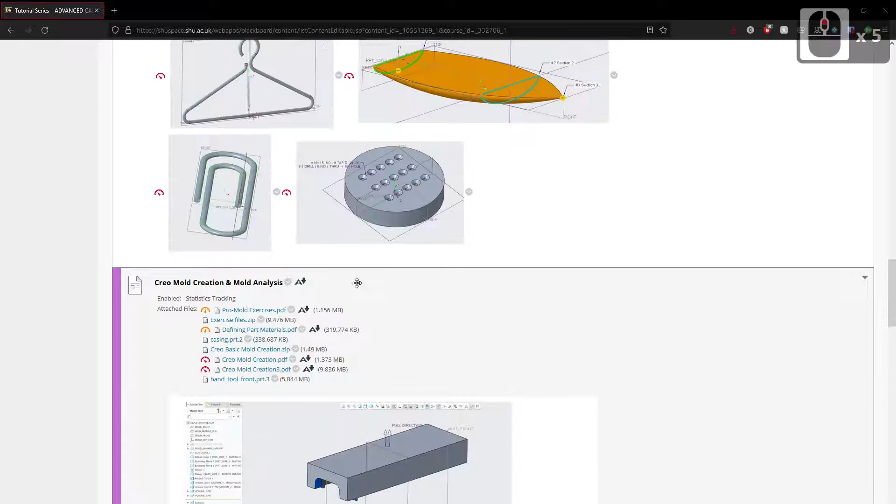Okay, so in this week's tutorial, what we're planning on doing is taking the design of our handle front that we worked on last week, so that is this half of the overall handle, and then using a module within Creo which allows you to produce moulding tools from your designed parts.

So the area that we'll be working from is here in the learning materials, just after last week's material. There's a screenshot here of what we're hoping to achieve by the end of the session. So hopefully you can tell this is a two-piece mould, and it will create the part that we've just talked about, the handle front that we were working on last week.

So before we get started, if you just want to go back to the top of the page and take a save of the config_D.pro, so that would be this file here, and then when you've booted up Creo, you need to apply that file just to set all the config options. Otherwise some of the activities that we're going to do in this tutorial won't work properly. So I'm going to apply that now.

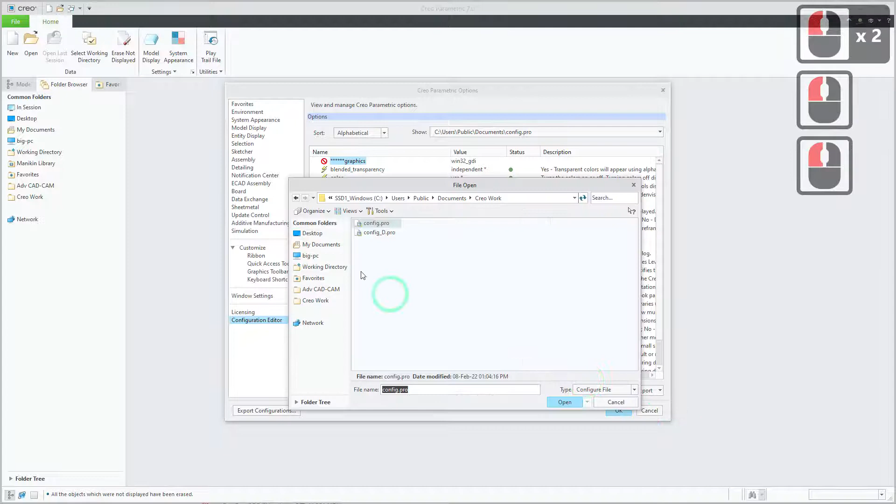So File, Options, Configuration Editor, Import, find where you've saved the file to. So there's my file in my work directory. Click on OK, and then click on OK again. And if you get this pop-up, you can just answer no to that. You don't have to save that file again. You can just answer no.

So now what I'm going to do, I'm going to set my working directory. Now I've already done this before I started recording this session, so you can see I'm just working in my documents and in a folder called Creo Work that already has some files in there. And then I'm going to go back to the learning materials, scroll down to where we're working this week, and I'm going to do two things.

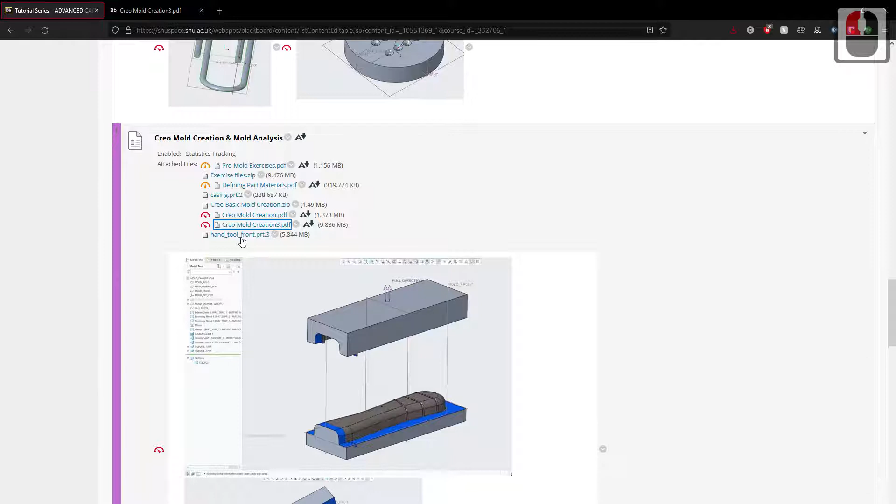I'm going to open up this PDF here, because that's what we'll be working from. So if I middle click on that, that will open up in a new window. So that's just loading in now, and that's what that should look like. That's the first page of the PDF, and I'm going to need to download this part file as well. So if you right click on that, save link as, and then navigate to wherever you're going to save it.

Now one thing that you have to be careful of here is that some browsers, Chrome included, or Firefox, often add extra brackets and numbers into the files that you download. So you can see here I've got a brackets 1 close brackets, and if I don't delete that like that, Creo won't be able to recognize that file.

So you have to make sure that the file that you save is named exactly as it's shown there, hand_tool_front.prt.3, and then you can save that into your directory. Now I already have a copy of that in the directory, so I don't need to press save there. So let's get started on the actual tutorial itself.

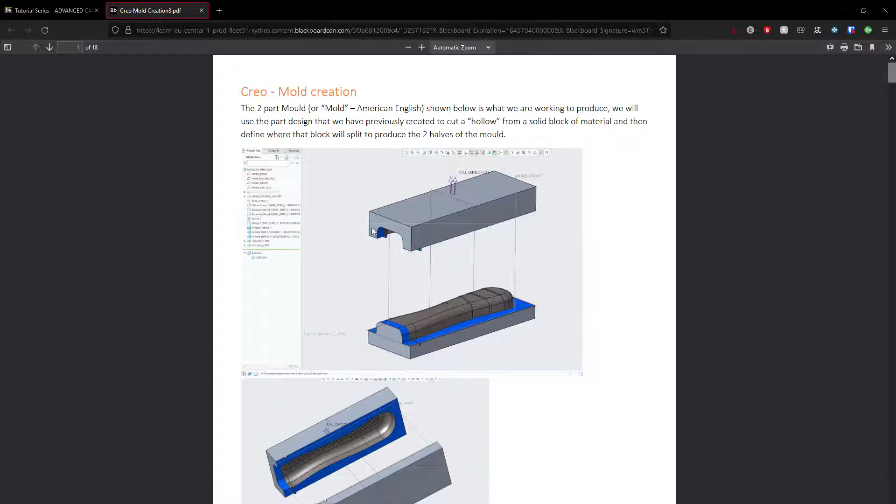As I've already said, what we're aiming to create is this two-piece mould, and in order to do that within Creo, it's a multi-step process whereby you start with the part design that you already have. In our case it's the handle front, and then you gradually build up the geometry that you're going to need to fully define the size and shape of this moulding tool. So that's the kind of broad outline of the process.

I've put a slightly more detailed outline here, and this is quite useful if you're having to replicate this process at any point for your own projects, let's say. If you just remember to work through these 9 points, then you'll have covered all the major steps required to actually produce these two halves of the mould.

Now there are other steps that we're not going to go into in this tutorial that add further details to the mould, such as runners or mould clamping fixtures and various other things that you would want in your mould, but this covers the basic steps of producing that two-piece moulding tool.

So I'll keep momentarily referring back to this PDF guide, but I won't necessarily view all the steps, but you can keep this guide. You can work through it at your own pace in conjunction with this video or just on its own, so that is entirely up to you, but the guide is reasonably comprehensive in terms of the steps that we have to go through.

So the first thing that we're going to do is create a new file, so that is this step here. So I'm just going back to my Creo window. There's Creo. So I'm going to go new file. What sort of file?

This is going to be a manufacturing file, and the subtype is going to be mold cavity, because that is what we're trying to produce. And then I'll give this a sensible name. So this is a mold for the handle, so I might call it handle FR for front, and then it's a mold tool, so I might put the word mold at the end of it, so handle front mold.

Click on OK, and then depending on what systems you're using and how those systems have been set up, you may be confronted with this screen. This is essentially asking about the unit system that we want to use and the part template. So I'm going to use millimeter newton seconds. So if you select the same option there, that will be fine.

Then we get dropped into the mold creation environment. It's very much like the standard assembly environment that we've already done some work in. We get our three datum planes here, so we get a right, what is essentially a top plane, and a front plane, and then we get a default coordinate system as well.

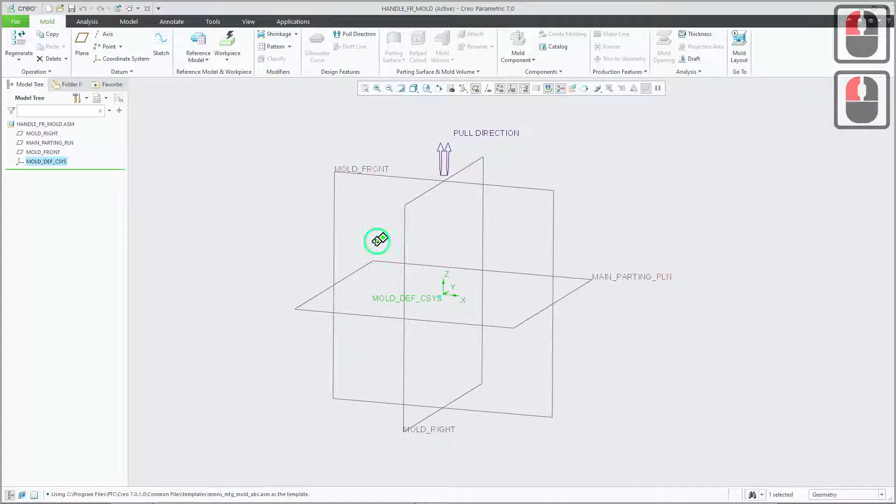And the first thing that we're going to do is bring in a copy of our finished part. So we're going to point the system at our finished part file and tell it that that is the part that we're hoping to create a mold for. And then the system will import that part, but it will import it as a copy. So that ensures that we don't accidentally make any changes to the part or maybe delete the part. So it creates a linked copy of the part. And when we do this, we refer to the imported part, this copied part, as the reference model.

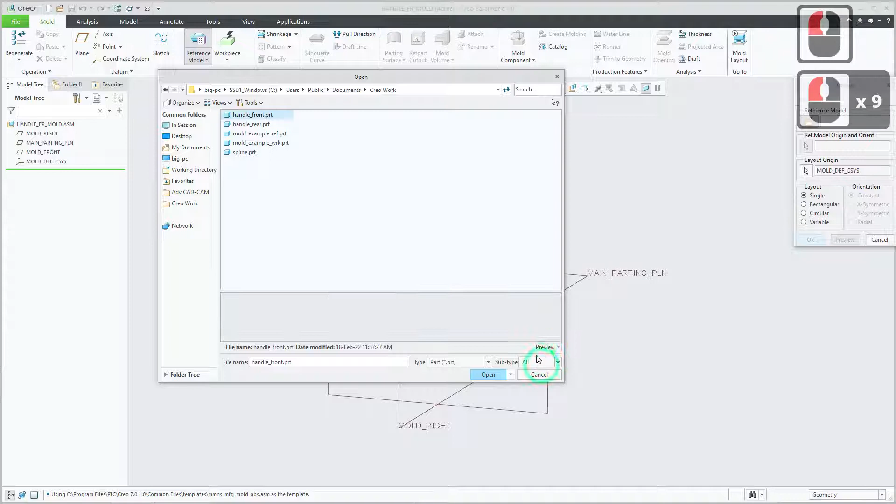So we're going to click on this button here, reference model. The system will then browse to our working directory. You can see I already have the handle front in that working directory. If you're not sure what these files are, if you'd like to see a preview before you open one of them, you can click on preview down at the bottom there, and you get a nice 3D preview of any Creo files before you load them in. So that's quite a nice little extra feature within Creo itself. So I'm going to open this part now.

Then I get confronted by this next screen. Essentially what this is asking is, the copy of your part, do you want that copy to be linked back to the original part? And we can have that link bidirectional, which is this default option that's been selected. Or I think probably slightly safer for us learning how to use this tool within Creo is to select this bottom option. So select inherited. What that essentially means is the original part can affect the copy of the part that we're about to create, but the copy cannot affect the original, which is probably a slightly safer way for us to work. So inherited.

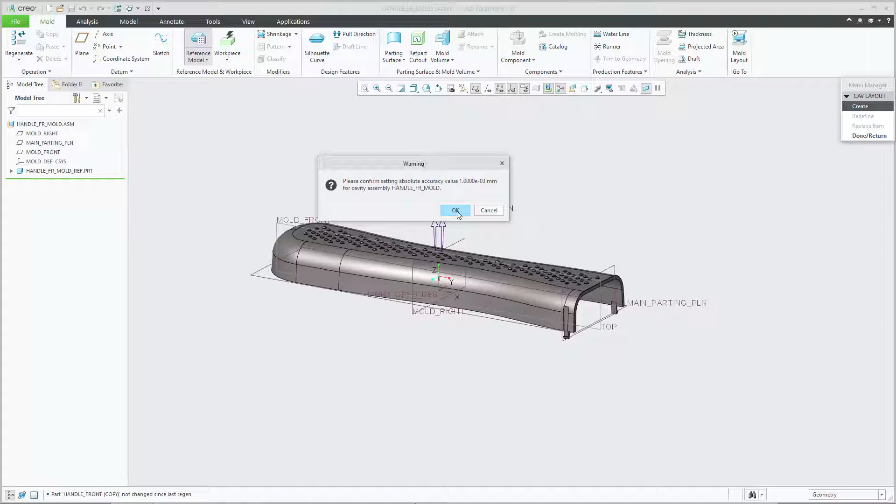Click on OK, and then at that point we should be able to press preview and we can see where the part's going to be placed by default. Now we can play around with that placement, but for this tutorial we'll just accept the default location. So OK. The system will then give us a warning that it's modifying the accuracy of the system. We can just OK that warning as well, and then we can close this little menu because we've concluded those first steps.

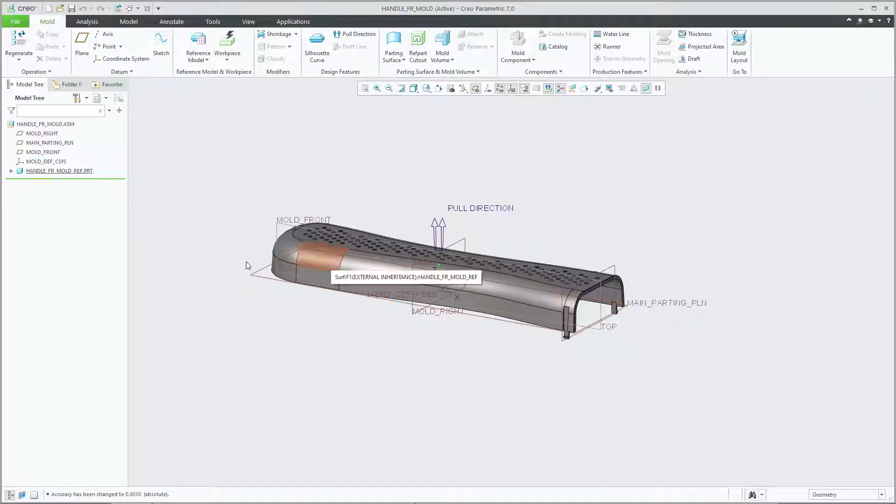So the next thing that we're going to do is put a block of material around our reference model. So here's our reference model that we've just imported. There it is in the model tree. The next step is to essentially block out the final outside sizes of the mould itself. So given that we're producing a two-piece mould, when the mould clamps together, the two halves of the mould, their external shape is essentially a cuboid that is bigger than the item that we're going to mould. So we're now defining how big do we want that cuboid around our reference model.

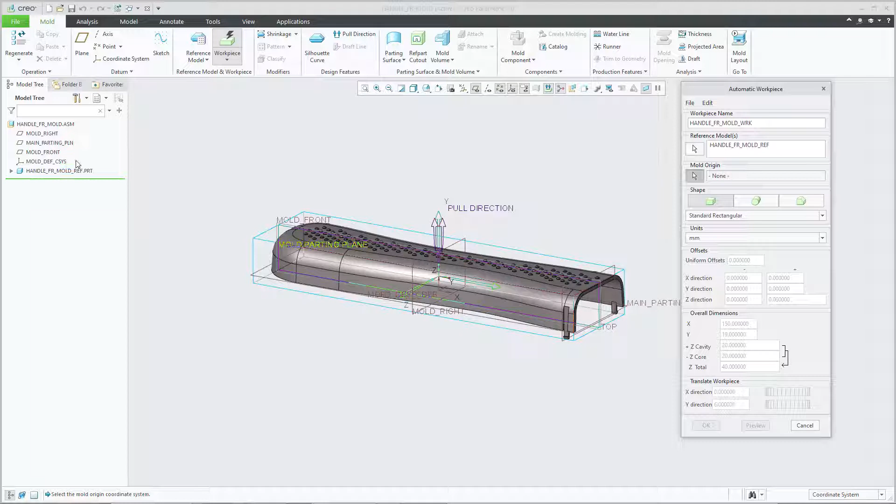And the way that we do that is we click on workpiece, because that cuboid is known as the workpiece. So click on the workpiece button. We need to put two things into this workpiece creation box. The first thing that we need to define is what coordinate system we are going to use to define this box, and the one that we're going to pick is the top level assembly coordinate system here in the model tree. So I'm just going to click on that coordinate system.

You can see that's now being collected into this mold origin input box, and then what I can do when I've done that is just put 10 for 10 millimeters, press enter, and what that does is it offsets my cuboid away from the reference model by 10 millimeters in every direction. So that's X, Y and Z directions, and you can see that below in all these 6 boxes.

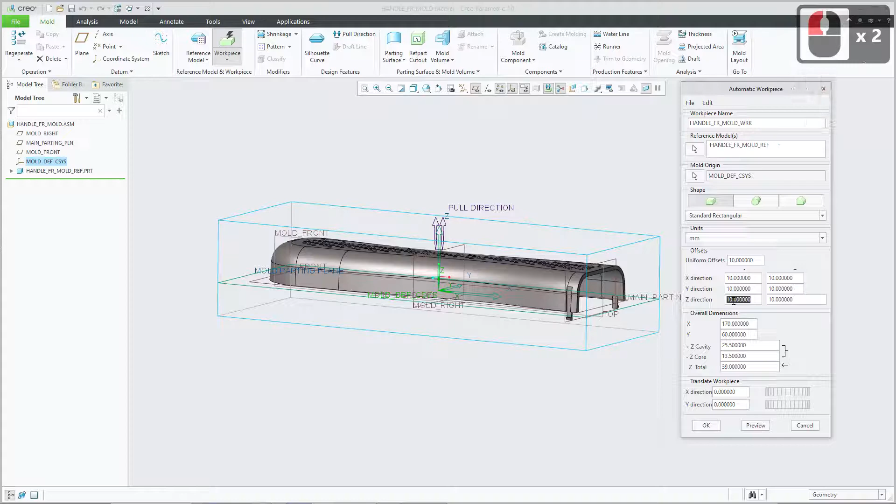So if I want to put some custom offsets in a particular direction, I can then edit these values and maybe have 20 or 30 or whatever value I require in whatever direction, but we'll accept this 10 millimeters in all directions for this particular example. So I'll click on OK. The workpiece gets created, so it's represented as this transparent green box, and there it is in the model tree.

So the next step that we're going to do is we're going to account for any material shrinkage that almost inevitably occurs when you plastic injection mold parts. So the general process is that you will inject heated molten material into the mold cavity. The molten material will flow into the mold cavity, fill the mold cavity, and then normally the mold is cooled down relatively rapidly, and what tends to happen is the plastic that's been injected shrinks slightly.

So in order to account for that, what we need to do is create a cavity that's slightly too big, so that's slightly bigger than the final part that we require. So we're going to do that now, and the button to do that is the shrinkage button here. And then there's two things that we need to enter here. There's the shrinkage ratio of the plastic that we have chosen to use.

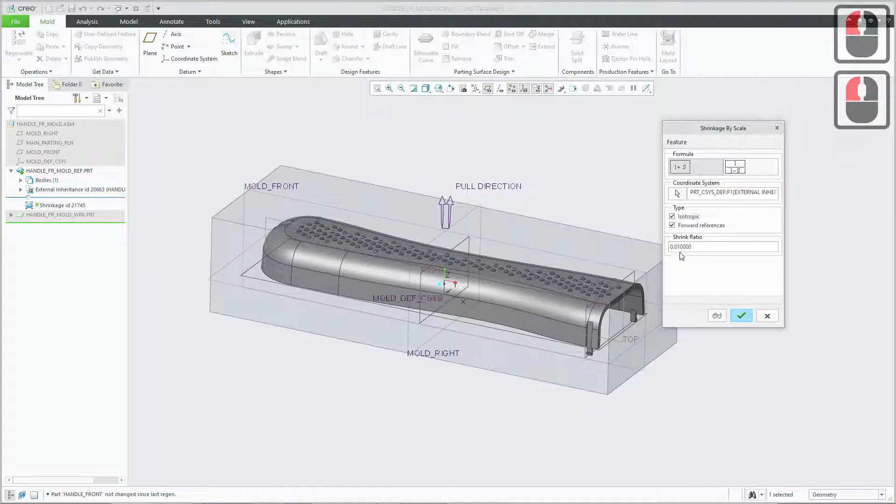We've accounted for the shrinkage, and the shrinkage as a feature in this setup gets stored within the reference model itself. So there's the reference model in the model tree, and if we need to edit the shrinkage at any point, we can browse inside that, click on the shrinkage, go edit definition, and we're back in the shrinkage menu. So say we wanted 2%, we could put 2% in. We don't want to do that at this point, but it's good to know how to do that if we need to further on in the design process.

So let's refer back to our PDF, see how far through we've got. So we've done these steps, we've brought the reference model in, we've created our workpiece around it, we've applied a shrinkage ratio. So the next step here is to define two items, one of which is known as the silhouette curve, and the silhouette curve is essentially the shape of the outside of the part that you would see if you were looking down from above onto the part. So it's that external silhouette of the part itself.

It's all the outside edges as a curve, essentially, or a line. You can almost regard these as a sketch. So it's a single line that traces all the way around the silhouette of the part. And the reason that we need to create this will become clear in the next step after this, where we use this silhouette curve to create a collection of surfaces that ultimately allow us to split the mold into two sections.

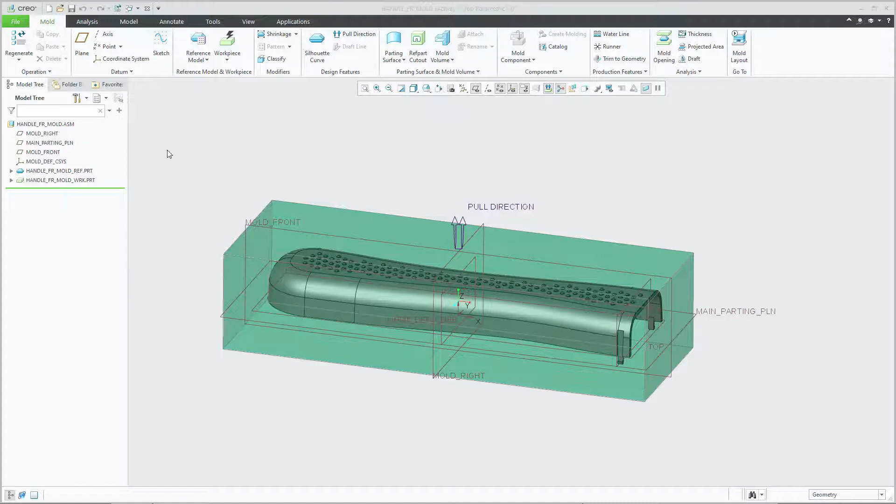So we're essentially creating, if you want to think about it like this, a cutting tool or a knife edge to actually split the mold in two. So silhouette curve, there's a button for silhouette curve, we'll click on there, and really all we've got to do at this point on this particular example is just zoom in and inspect this curve and just check: does it seem to be complete? It does. It seems to trace the entirety of the outside of the part.

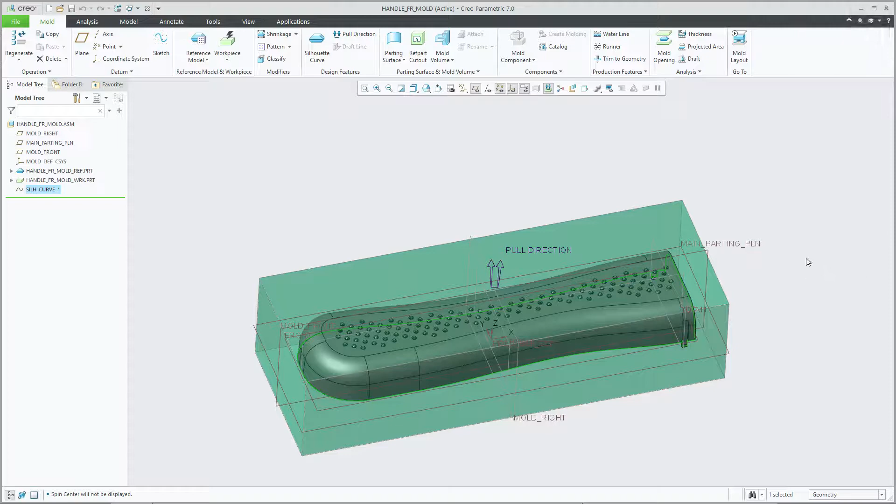Another thing to check is, am I getting a preview at all? Sometimes if there's some error in the geometry of the part, you may have to go back and correct that to get the silhouette curve feature to work, but this one seems fine, so I'm just going to OK that. And then that curve is now selected, which is why it's highlighted in green. If I want to deselect it, I can click into some empty space over here, and then the curve is still there, but it's in this kind of pale blue colour now, and it's been entered into the model tree over there.

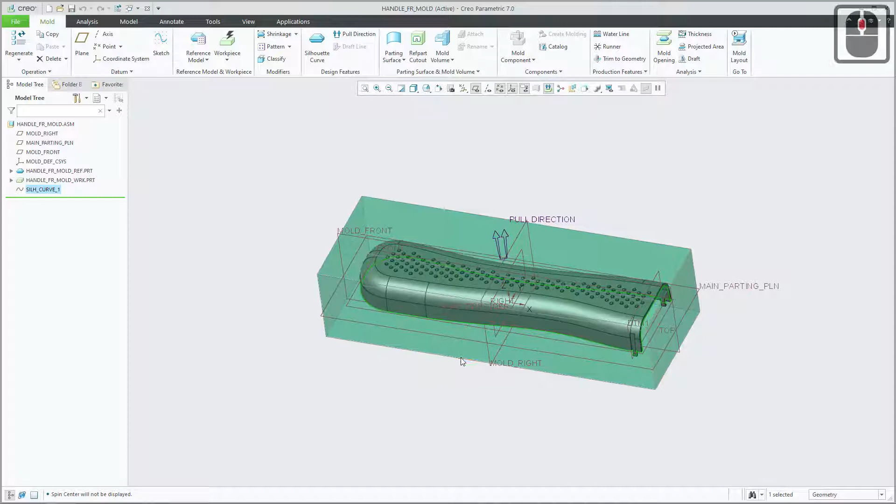So the next step that we need to perform is we need to use that silhouette curve that we've just created to generate what's known as a parting surface. So you can see the parting surface tool here, and as I've already talked about, you can think of the parting surface as a cutting tool that we will eventually use to split this block into two halves.

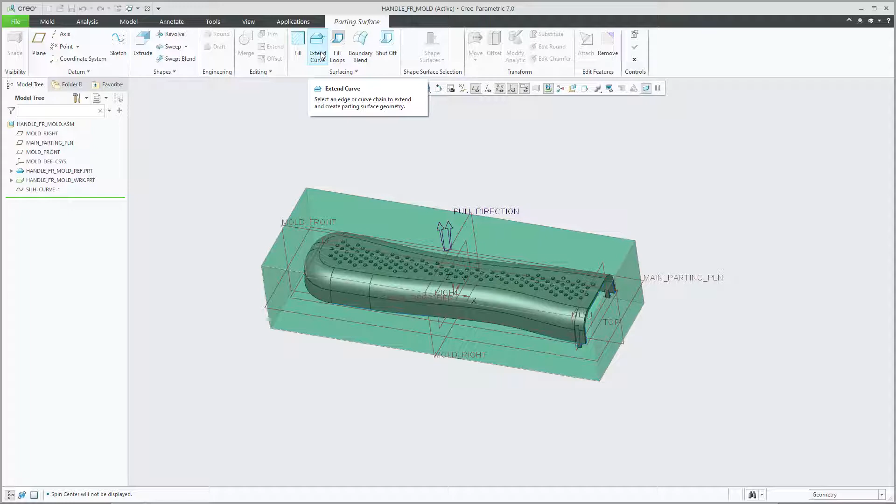So if we go back to our Creo session, I'm going to click on parting surface to tell the system that I intend to create a parting surface or a collection of parting surfaces. And then within the parting surface tab, we have these tools here which allow us to generate surfaces in certain ways, and by far one of the easier tools to use is the extend curve tool, and this will extend our silhouette curve that we've already created outwards towards the outside surfaces of our reference block. So our reference workpiece that we created, this green block, it will bridge the gap between the edge of our reference part and the edge of our workpiece.

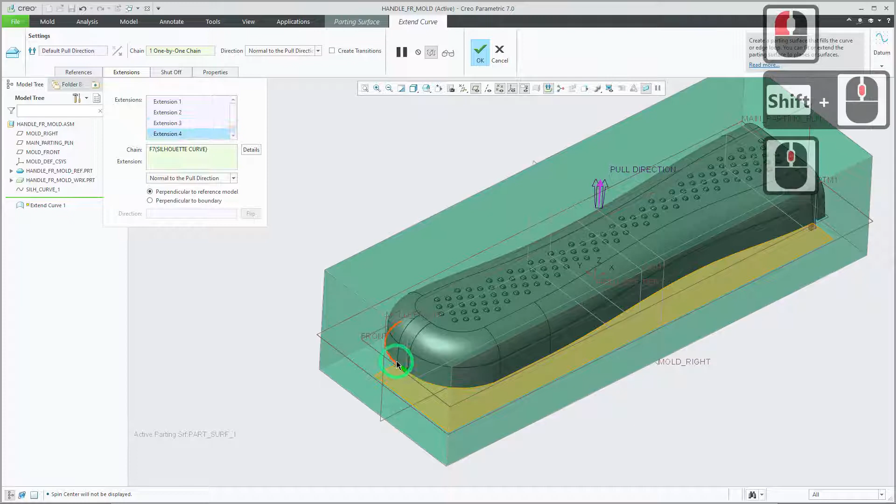So let's initiate that. So extend curve, and then because we're arguably new to this process, it might be useful to open some of the further details within this extend curve feature. So I'm going to open this extensions tab, and then I'm just going to zoom in a little bit here, and I'm going to start clicking on portions of the silhouette curve that I previously created, and hopefully you can see what's happening in the preview there. As I click on the curve, it bridges the gap between that curve and the outer surfaces of my workpiece block.

And on a lot of the curve that we've generated here, that will do the job of creating our parting surface. However, there are certain little areas down near the clip features here, specifically these near vertical edges and this edge that you could in some senses regard as an overhang, and this edge down here as well, that cause the extend curve tool not to work correctly for these specific sections of the silhouette curve. So we're going to leave those ones blank, and we're going to come back and tackle those ones with a slightly different surfacing tool.

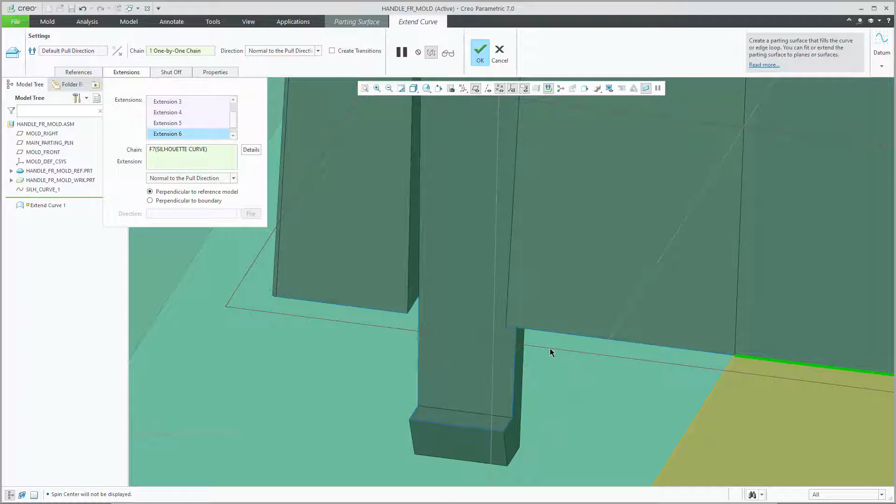But everything else on the silhouette curve, so this edge here and this edge here and this edge here, and then continuing round the front of the part here, all these subsequent edges, we can just use this extend curve tool to generate our parting surfaces from. So I'm just working my way around here. For this particular tool, I don't have to hold down Control to select all these edges, and that's because it's collecting each little edge that I click on as a separate selection. So you can see it names them all extension because it's extending a surface away from that silhouette curve.

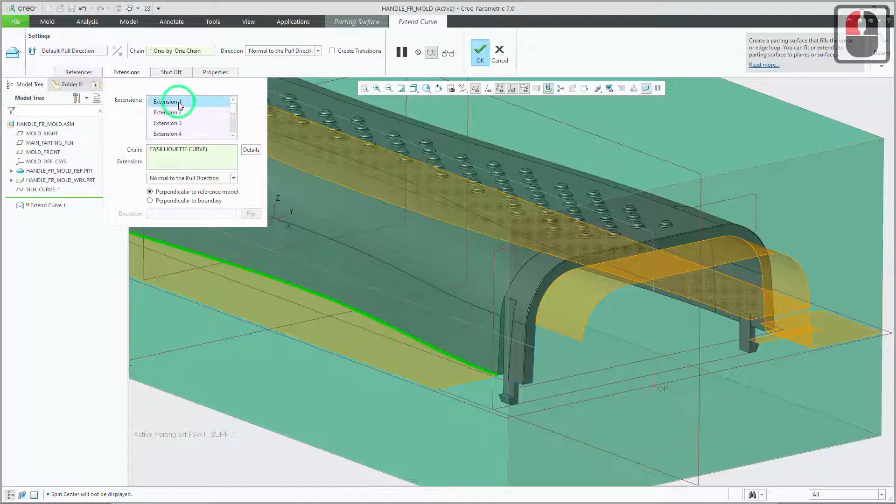And if I click on extension 1, it highlights in green what specific piece of the edge or piece of the silhouette curve extension 1 is coming from. So in that way, if I need to delete anything, if I click on something by mistake, I can find it in this list, right click and say remove, and it deselects it essentially. So yeah, we can add things to the list of extensions, we can delete things from the list as well.

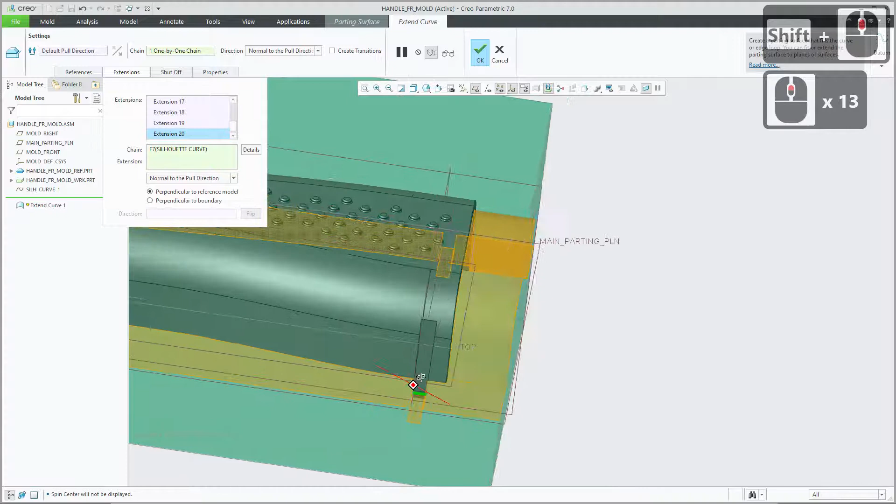So I'm just completing selection of all the edges that I want for that tool. So this is the final one down there, and then that's done the majority of the job for us now. It's done maybe more than 95% of the total silhouette edge, if you want to think about it like that. The only ones that we're going to have to tackle with a slightly different tool are these little kind of overhangs and near vertical edges.

Now you can try clicking on these just as an experiment to see what happens. So if I click on this one, you can see some of the problems there that we're going to have. So that doesn't seal up the gap that we have here between these two surfaces. Instead, it incorrectly chooses the wrong direction to extend off into, and that will cause problems. So we don't want that. So that is extension 21. So if I just right click on it and press remove, that will get rid of it.

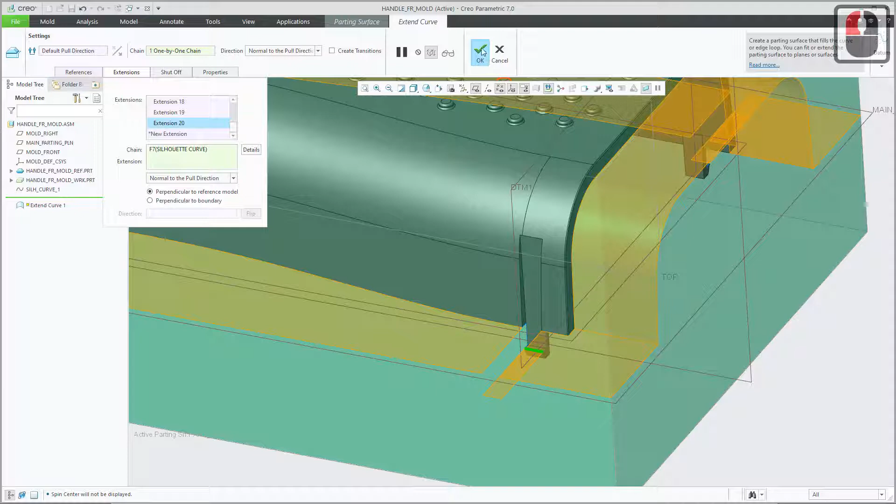So we're going to OK that tool, the extend curve tool, and we've got the majority of our surfaces there. Now we need to look to a slightly different surface tool in order to patch up this gap that we've left here. So there's a gap between this upper surface here and this lower surface.

You can see as I'm moving my mouse pointer around, the system's trying to select the workpiece itself. And that is quite annoying. That's not really helpful when we're working on these surfaces. So what I'm going to do is I'm going to hide the workpiece temporarily. So if I find the workpiece in the model tree over here, just click on it, and then that is the icon to hide something in the model tree.

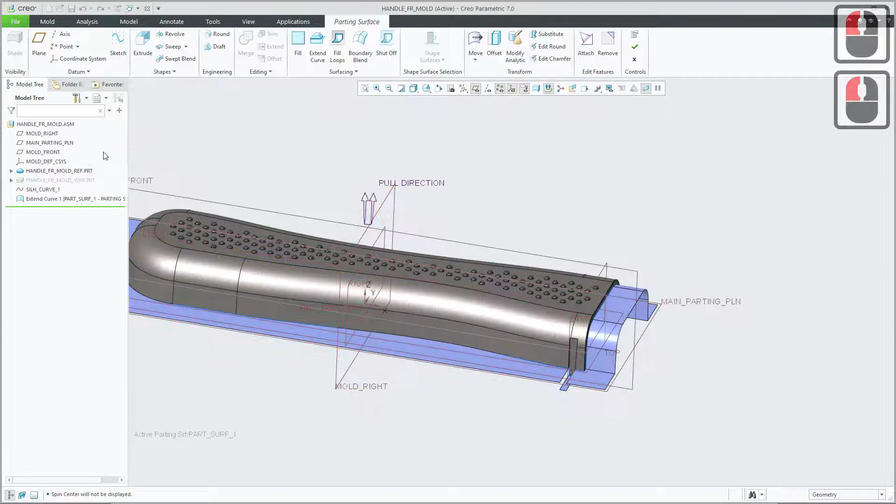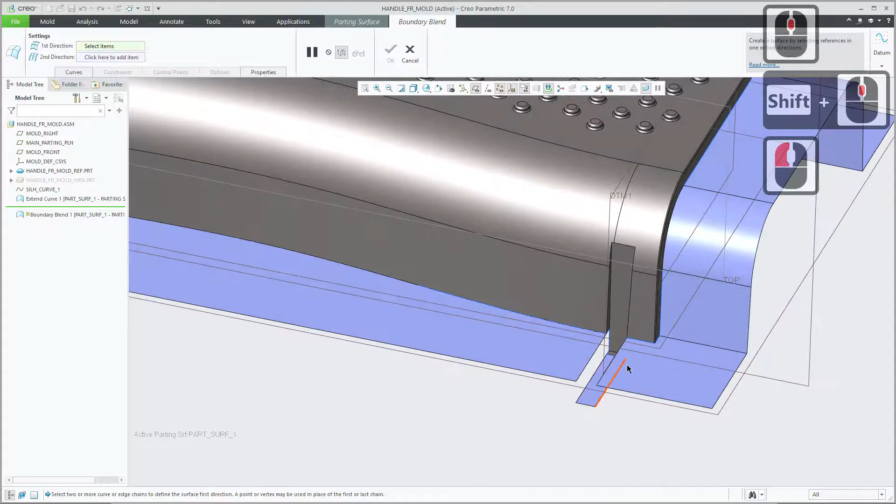So I'm still in the parting surface tool, and then within the parting surface tool I'm going to now use the boundary blend surface tool or surface feature. So boundary blend, and what I'm going to do, again, I want some further detail about this feature. I'm not confident enough with the system to just start clicking on things.

So I'm going to click where it says curves here to open up some further detail, and then I'm also going to click where it says details here, and that allows me to more fully appreciate what I'm actually doing. So then I'm going to click on this lower edge to collect it into this references box, and then hold down Shift because I want to add something else to it, and I'm going to click on this edge here because I want to add those two edges together into what's known as a chain of edges. So I have to hold Shift to select this second edge.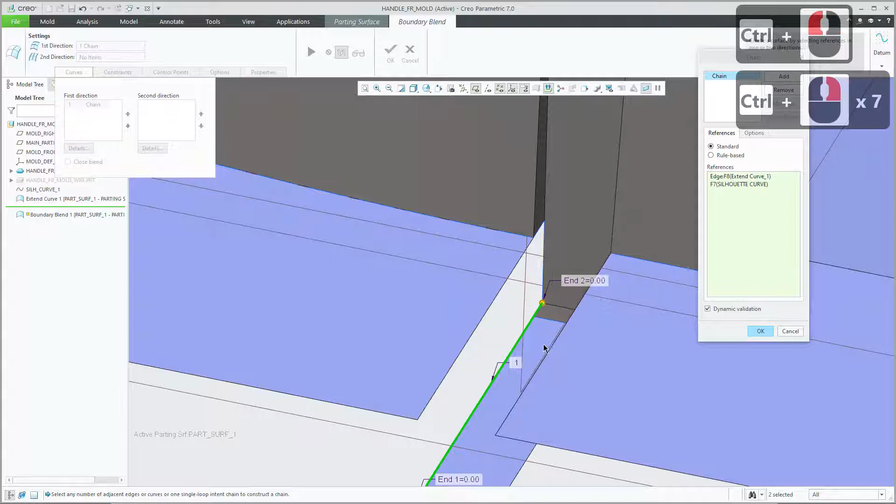Now if your system's trying to display the entirety of the silhouette curve when you try and select this edge, you can try right clicking the mouse button until you can just select this little short edge here. So I'm holding down Control now and I'm clicking on that edge. Then the edges that I've selected there highlight in green, and they get entered into this references box here.

So that is the slightly shorter one, the one that's part of the silhouette curve, and this is the slightly longer edge, which is the edge of this existing surface. So they've now been added to this first chain. So I want to create a new chain, so I'm going to click on Add. So that first chain is still there. Now I'm selecting things to add to a second chain.

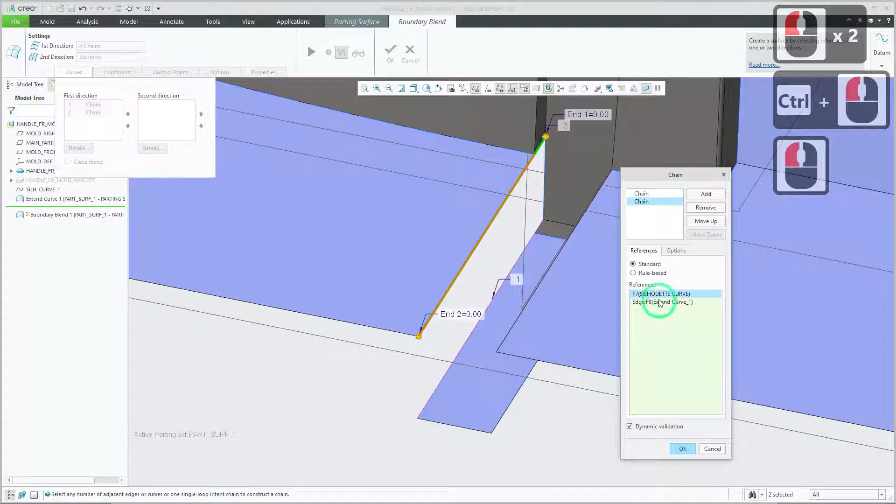So I'm going to do a similar thing up at the top here. I'm going to click on this edge first. That edge gets entered into the references box, and then I'm going to hold down Control and select that little edge there and click. So both those curves or edges have been collected now and added together into this second chain here.

So at that point I don't need to collect any more chains, I just want to click on OK and see what this boundary blend feature is going to look like in the preview. So OK, and that's what it's going to look like.

So it's going to look essentially like a planar, flat surface. So that looks OK. Now, just as a slight aside there, it's got nothing to do with the boundary blend tool.

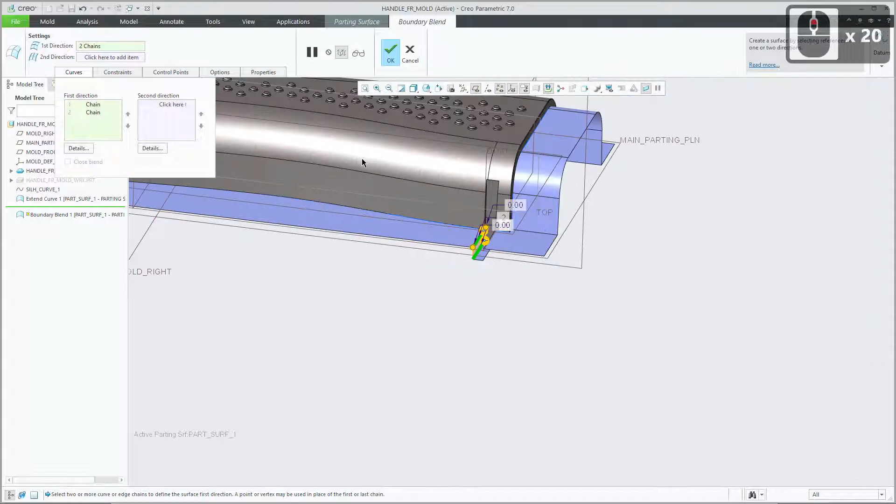When you're working on a part and you're zoomed in to quite a high magnification like we're doing, so the part itself is relatively large compared with the area that we're actually working on, then it can be useful to switch this option off. So I have this switched off currently, and that is the spin center. If you have that switched on, which is the default setting, and you try and hold your middle mouse button and rotate your view, that is what tends to happen.

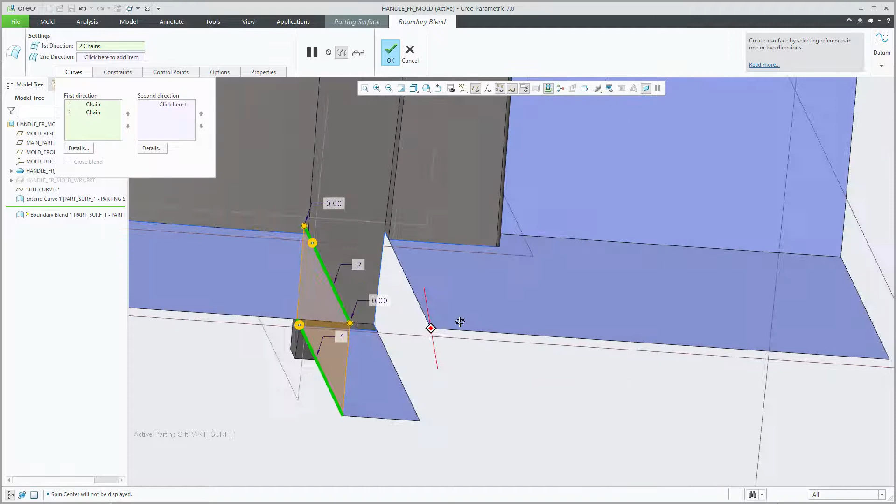The thing that you're working on disappears from view, and you have to do some work to get it back into the viewing window. Whereas if you turn that option off, any item that you have highlighted under your pointer, like this edge in orange, that is what your view then rotates around. So hopefully that's a little bit easier to work when you're zoomed in quite a long way on a part like we are.

So I'm happy with that boundary blend, so I'm going to click on OK. So there's my boundary blend surface. There it is. It's patched the hole that I previously had there, and I'm happy with it. So if I click on it there, it highlights the surface in green there. So what I'm going to do now, I'm going to create a second boundary surface.

So I'm going to make sure I've got nothing selected just by clicking in some empty space. Click on boundary blend again, rotate my view a little bit, open up the details tabs, so curves and details. This allows me to see what I'm actually doing a little bit more clearly. So if you remember, we're going to collect a first chain, and then we're going to add a new chain, and we're going to collect things to put in the second chain.

So the first chain is going to be this edge, and then hold down Control, and then I'm going to add that little edge there to it. So I've got those two edges in the references box. They are now collected as this first chain.

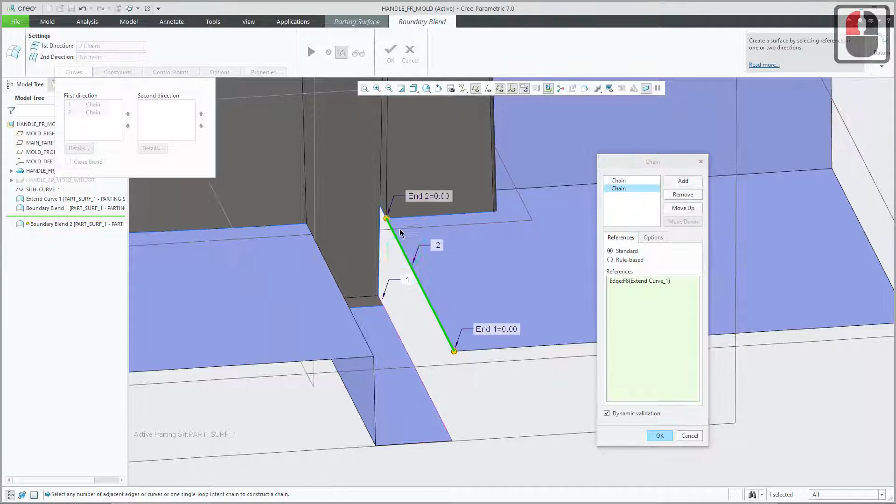I want to add a new chain. So click, I'm now adding a new chain. So I want to do the same thing, but on that edge there, and then hold down Control, and that edge there. So I've collected those two edges, and they are now the second chain. So this chain here.

So then I'm happy. I want to see a preview of what that boundary blend surface is going to look like. So I'll click on OK. Yep, again it looks good. I can't see anything wrong with that, so I'll click on OK. So there's the boundary blend.

So they look okay. So at this point, if we just refer back to the PDF, we've essentially completed all these steps. These are all related to the extended surface that we did first.

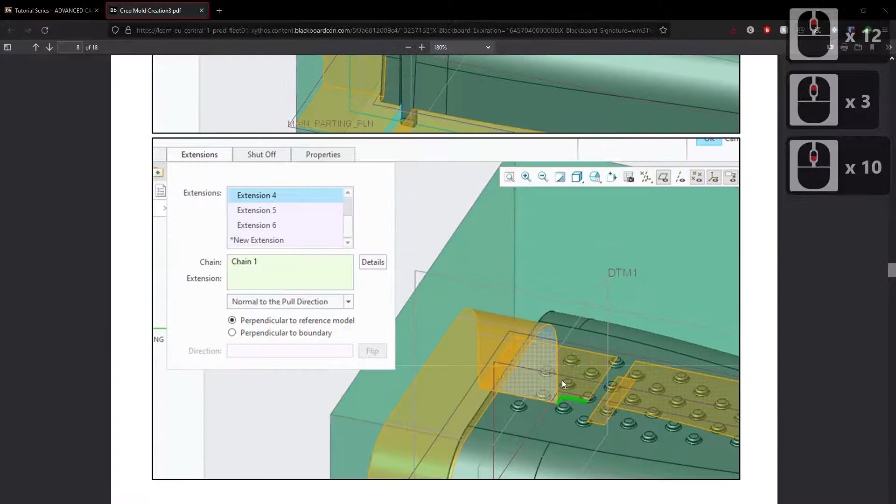So this is the first boundary blend that we created. So we're coming up to the point that we've actually reached. This is the point. So when we've created two of these boundary blends, what I did originally when I wrote this PDF was I used the mirror tool to mirror these two boundary blends over to the other clip on the other side of the part.

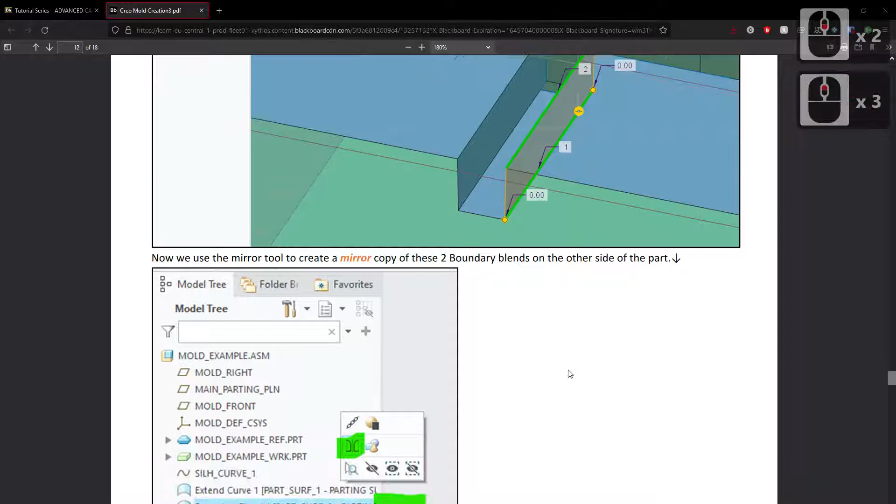Now that did work originally, but when I tried to replicate it on the university machines, I was getting some errors. So what I'm going to show you now is a slightly different method, and this method is just going to involve doing exactly what we've done for these two boundary blends, but on the other side of the part. So this method seems to work regardless, whereas the mirror command, it was working and then it didn't work when I demoed it again on the university installations.

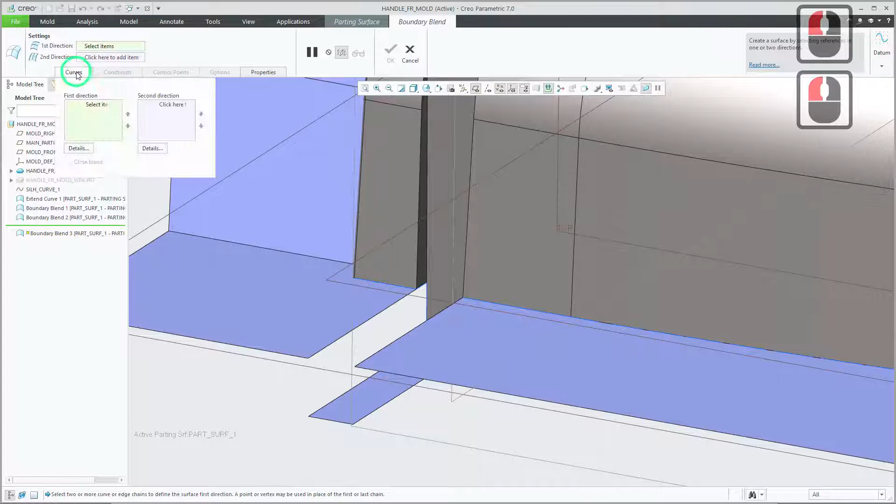So let's do the boundary blend tool again. So we'll click on boundary blend, open up the curves tab, open up the details tab so that we can see what we're doing. Should be reasonably quick at this now. So it's this line, hold down Control, this line, add a new chain because we've completed this chain, this collection of two lines, new chain.

Then I can't see the two lines that I want to work on, so I'll just rotate my view a little bit. So it's this line, hold Control, and this line. So there they both are. And if you hover over them, they highlight in orange to show which reference is which. So we've got our two chains of edges.

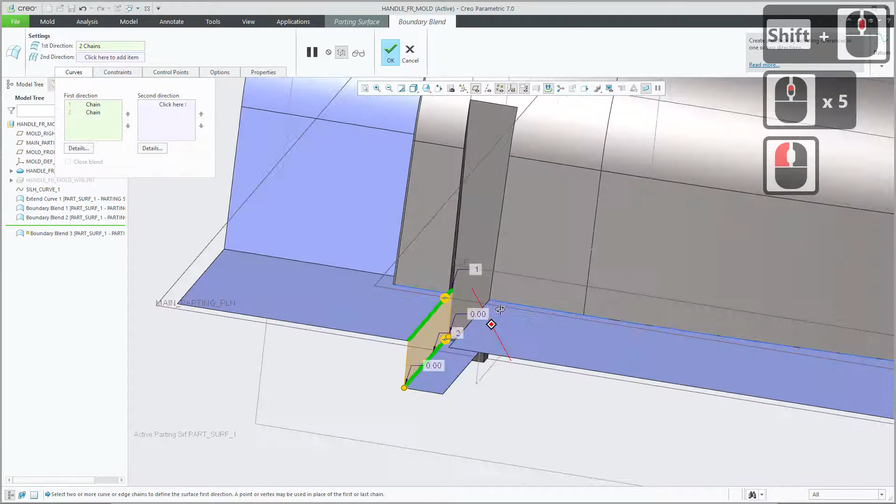Click on OK to see the preview. The preview looks okay. Click on OK. And then we've just got one last boundary blend surface to do now. So boundary blend. Click on this line.

I didn't open the curves tab. So let's go to details. So here we are. We've already got the first edge selected, so I just need to hold down Control.

Now this is quite good. What's happening here is it's not letting me click on that single edge. It's trying to select the entirety of the whole silhouette curve itself. You can see that highlighting in orange. Now that is not what I want.

So if you get into this situation and you know there's an edge under your pointer somewhere, you can press the right mouse button, and what that does, if you just keep pressing it, it cycles through all the things underneath your mouse pointer. So there could be multiple things. You can see there's a pair of faces there underneath my mouse pointer. There's the entire silhouette curve, and if I click again, there's the edge that I want.

So when you get to the one that you want, you can hold down Control. I'm just pressing it again to get to the one that I want. You can see I'm cycling through the things underneath my pointer. That is the one that I want. So then I can hold Control and click.

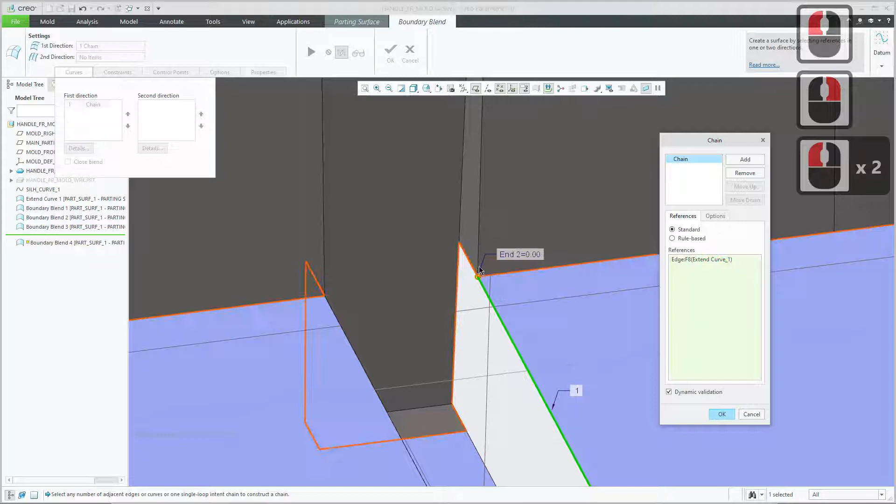So I'm holding Control, I'm pressing the right mouse button till I find the one that I want to select, so it's this one, and then I click and it adds it into the box.

So we've created the first chain, we want to add another chain now. So I move my view a little bit so I can see the lower edges. And then I'm going to select this edge first, it gets entered into the box, hold down Control and select that edge. So that should be okay.

The preview looks good. Okay, the boundary blend. So we've got a complete parting surface now.

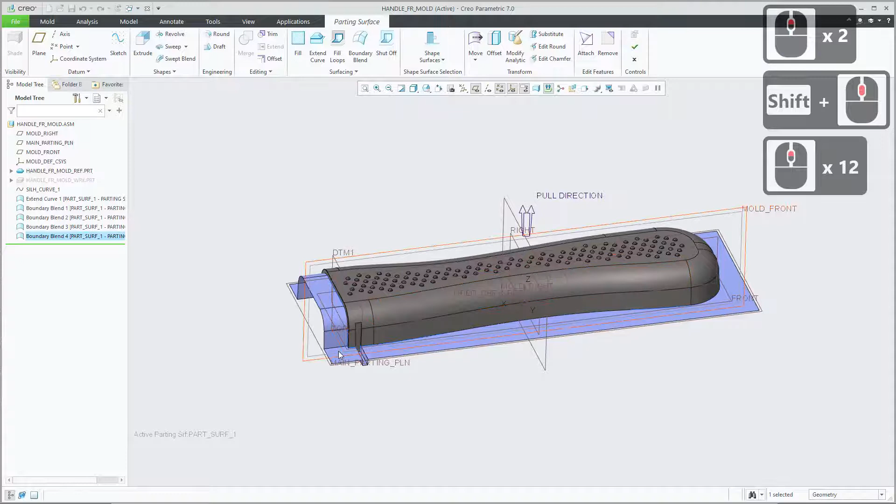You can see the parting surface kind of fills all the gaps in between the edge of our reference model, which is a copy of our part, and the outer faces of the workpiece, which is currently hidden. I've just shown it again to illustrate that the parting surface bridges the gap.

That will help us when we come to split this mold tool into two halves. The parting surface will allow us to define what that split surface will look like. So that is why we create the parting surface.

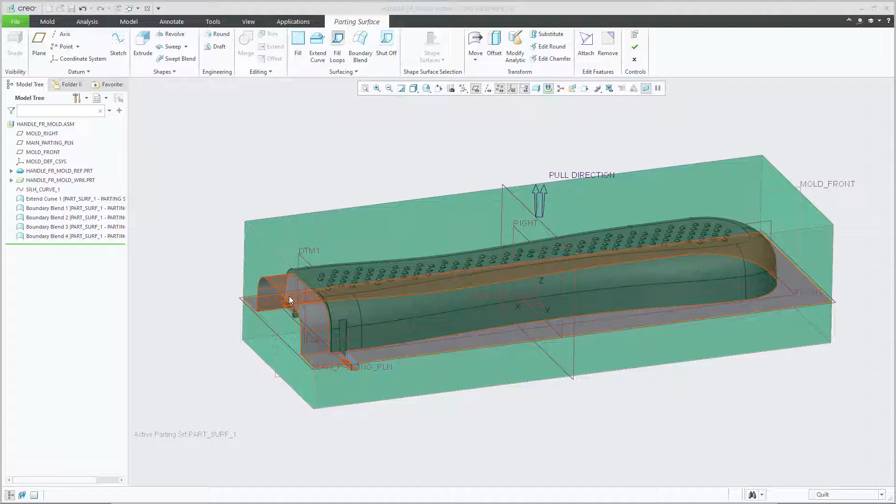So I've just got one last step to perform to complete that parting surface. What I need to do is merge those 5 separate surfaces into one complete continuous surface, so that when I later tell the system this is the surface I want to use as the cutting tool, I don't have to select each one individually—or rather, the system won't allow me to select each one individually. I must unify them or merge them into a single whole surface.

So we're going to do that now. It might be more useful to hide the workpiece again before we begin this. So I'll hide the workpiece. Then, down at the bottom right here, there's a little what's known as a selection filter.

What we've had it set on is to filter our selections to any geometry at all. So that really isn't a filter at all. It just allows us to click on any edge or surface or feature or datum plane or axis. It allows us to essentially select anything.

But for this stage we want to limit ourselves to only be able to select quilts, which is another term for surfaces. So if we set that to quilt and then zoom in a little bit, what I'm going to do is select that original surface or quilt.

So the big surface that we created first, so that would be this one, and that highlights in green—you can see those are all the faces we created with that big original surface, the extend curve surface.

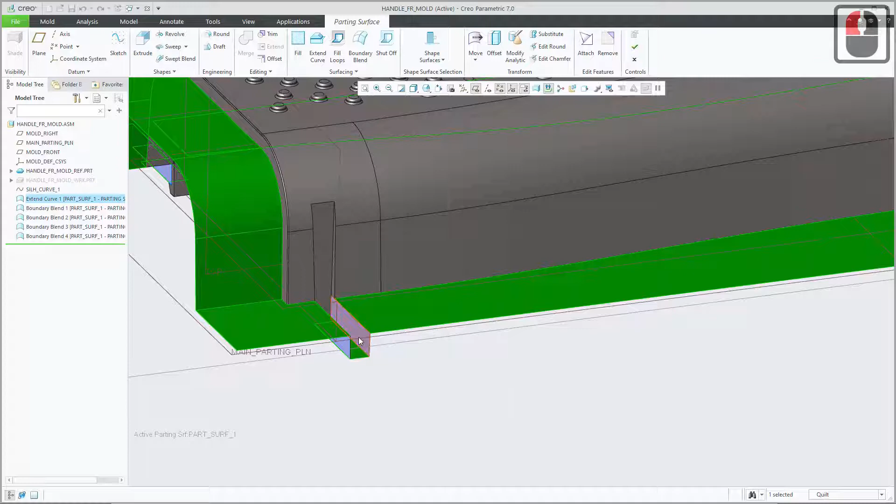Then I'm going to hold down Control and go around selecting all of the other little surfaces that we created. There's 2 on that side, so I'm holding down Control as I click on them. Click and click, and then some options pop up in my quick access menu there, and the one we want is this one.

If you hover over it for a second, it tells you that it's the merge command, and this merges 2 or more quilts into a single quilt or a single surface. So, merge.

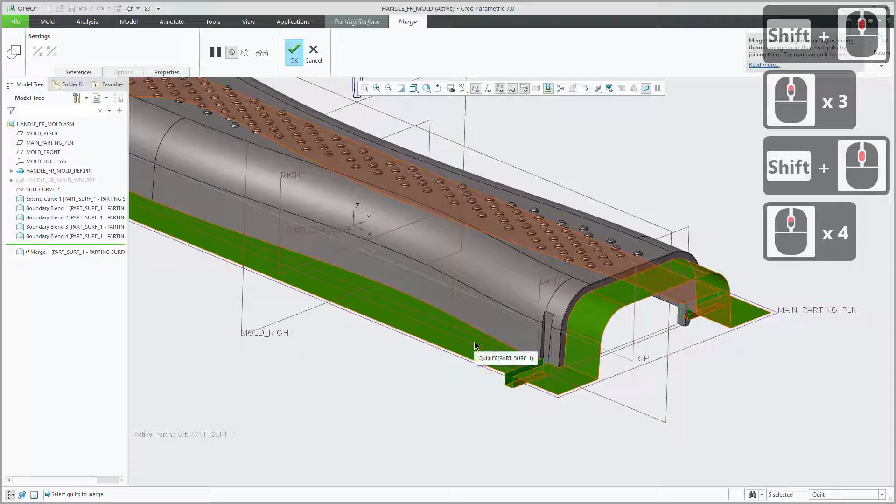The preview isn't that spectacular on this one, but I'm going to assume that it's okay and there won't be any errors when I click on OK here. So I'll click on OK.

The merge feature seems to have completed successfully, otherwise I would be seeing errors represented with little red icons in the model tree here. So we've done that step.

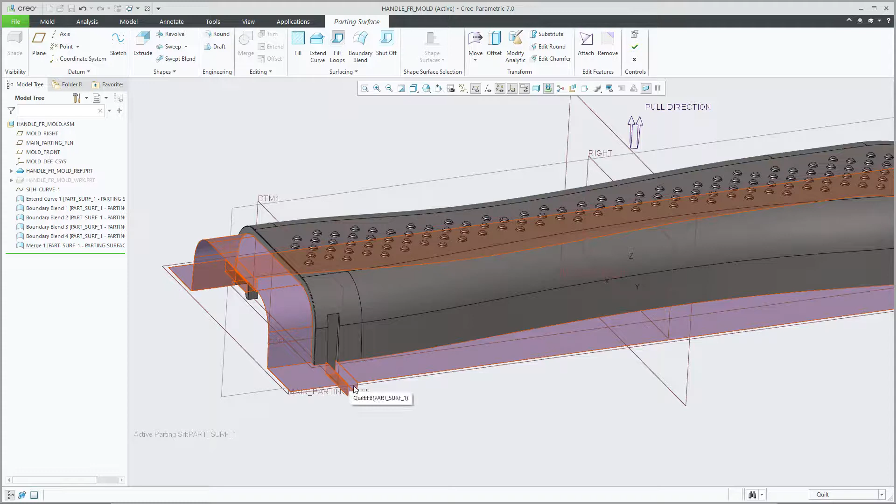We can now click on the entirety of those surfaces, all 5 of them, and they highlight as a single piece of surface geometry. So that's that step done.

Let's have another look at the PDF. So we've bypassed the mirroring command. We used the boundary blend command another 2 times to achieve what we would have done with the mirror command. Then we merged all the surfaces together.

So the next step here, if we read the text, next we will use the reference part, so that is our shape of our part that we want to mould. We'll use the reference part as a tool to cut away material from the inside of our workpiece. So this is making essentially

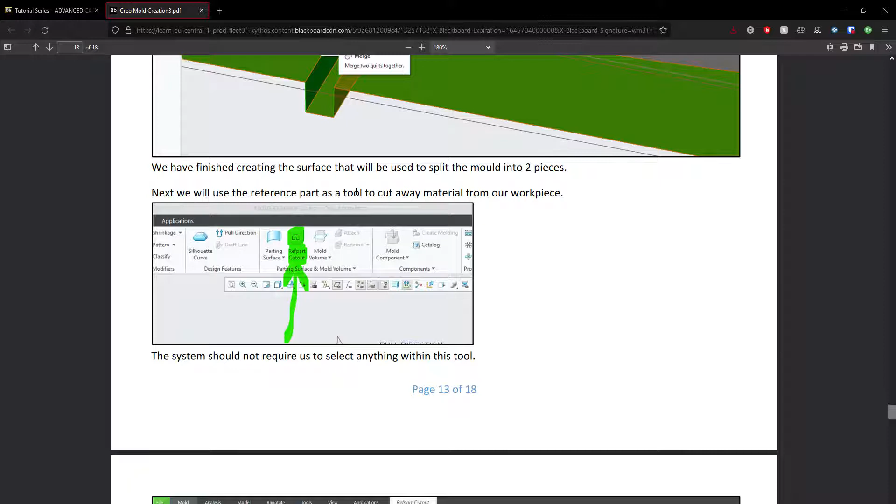a piece of missing geometry inside the workpiece. So this would be the cavity where the molten plastic gets injected into. So this is the tool that we're going to use, ref part cutout, because that is essentially what the tool is doing. It's using the reference part to create a cutout in the center of the workpiece block.

So let's get that working now. So what I have to do first is I have to exit out of my creation of parting surfaces. You can see I'm still in the parting surfaces tab here. So I have to OK all operations to do with parting surfaces.

And the way that we do that is that small tick at the right hand side. So in the same way that when we're in any tab within Creo, if the tab is active, it will tend to be at the rightmost of the screen, and it will be highlighted in that light grey colour. And that means that we have to either cancel what we're doing in that tab to go back to the previous tab, or we have to OK the edits that we've done and accept them, and then that tab will close and we will go back to the previous tab that we were working in.

So in our case, we're back in the moulding tab. So what are we going to do? We're going to do a ref part cutout. I think what I'll do is I'll show the workpiece, just because there's no reason to keep it hidden now. So show the workpiece. I may even put my selection filter back to geometry, so everything essentially.

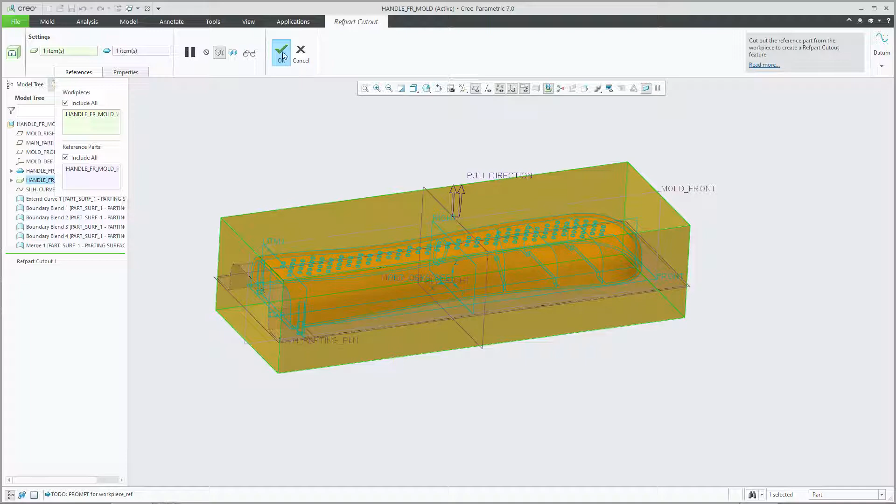So we don't really have to do anything. So we can just click on OK now. So what that has created, it doesn't actually cut a hole in the middle of the workpiece. What it does is it creates a copy of the workpiece down here, and it cuts away the center of that. So in this way, the system is creating new features down at the bottom of the model tree.

It's not being destructive to the existing features. It's creating new copies of them that have, in this case, the cavity missing in the center. So it creates this new feature.

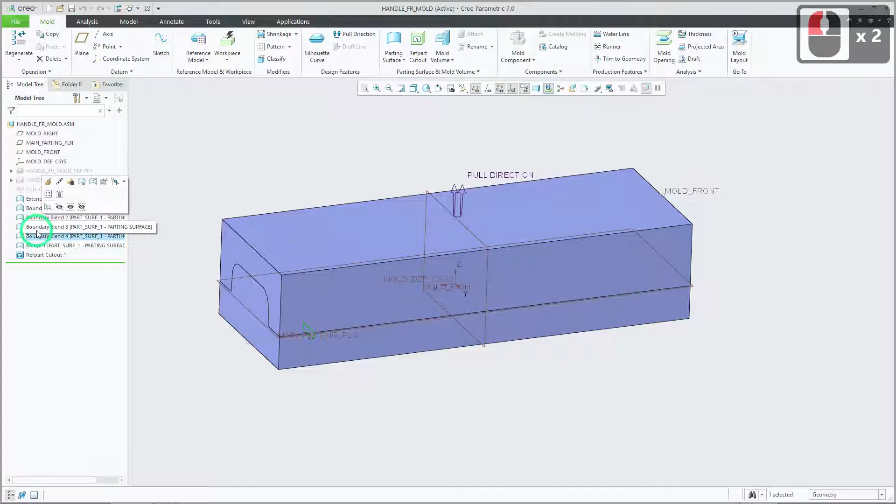So if we hide some things here, so if we hide the reference model, and if we hide the workpiece, maybe even hide the silhouette curves, so we've hidden all those original blocks and shapes we can no longer see. So the only real thing that we can see are some surfaces and this new ref part cutout.

So this should be a copy of the workpiece block, but with the shape of the reference model missing out of the inside of it. So let's see if it is. So what I'm going to do now is I'm just going to cross-section this thing temporarily to check that it has actually done what I've just said.

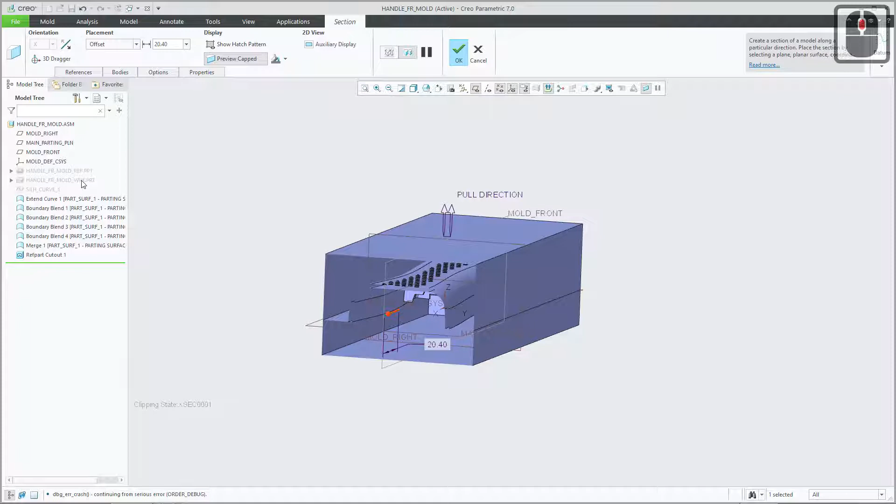So I'm going to click on the View tab, click where it says Section, probably click on this end face, and then drag the cross-section through the part. And if we look down into the block itself, it does appear to have done what I said it will do, which is create a copy of the workpiece and then remove a shape from the middle of that block which corresponds to the outside shape of our reference model.

However, it has created all those things as just surfaces, so you can see it's actually a hollow block. So the outside surfaces of the block are represented with these flat surfaces. The inside missing portion is represented with a bunch of surfaces that kind of define what bit of it is missing. But the area in between those two, so from the outer surfaces inwards towards the cavity, is all hollow as well. So it's kind of achieved what we want, but none of this is solid material at this point.

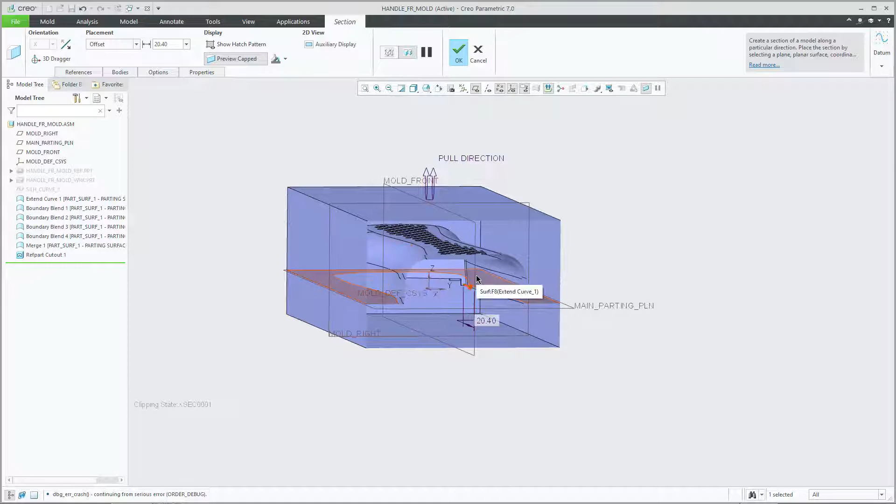So there's a few more steps that we have to go through in this process to create some solid parts that we could, let's say, CNC machine to create the mold. So we're part of the way there, but we still have to go a little bit further. So we're at this point in the PDF now. So let's go back to what we were doing.

I don't need this cross-section view. I only initiated this section view just to check what the inside geometry of the ref part cutout looked like. So I'm going to cancel the section view. I don't want to save it. So cancel. Do I want to cancel? Yes, I do. I need to go back into the molding tab because I'm going to do something else.

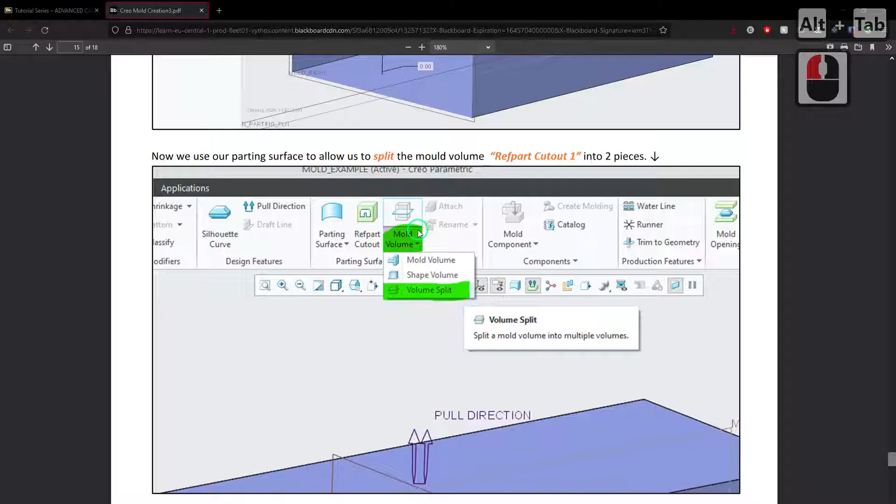So if we have a quick look at the PDF, what's it telling us to do? It's saying now we use our parting surface to allow us to split the mold volume ref part cutout 1. So ref part cutout 1 is known as a mold volume, and we're going to use the volume split tool to split it into two pieces. And the volume split tool needs a ref part cutout feature, which we already have, we've just created that, and it needs a parting surface to split that ref part cutout into two halves.

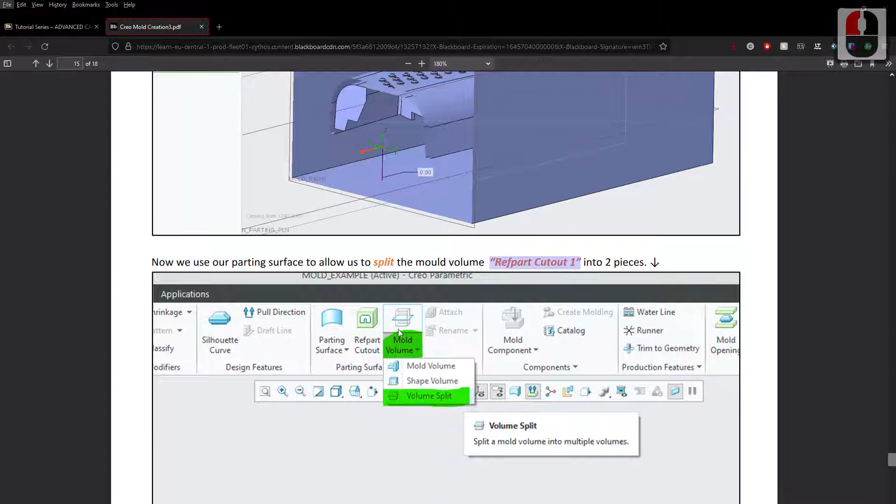So let's do that. So it's in the mold volume drop down menu. So here we are, and if we have a look in the mold volume drop down, there's the volume split command. And again, because we're relative novices at this, it will be useful to see what the system is asking of us in a little bit more detail. So if we click on the reference tab, it's essentially waiting for two inputs. The first input is what volume do we want to split. So that would be this ref part cutout.

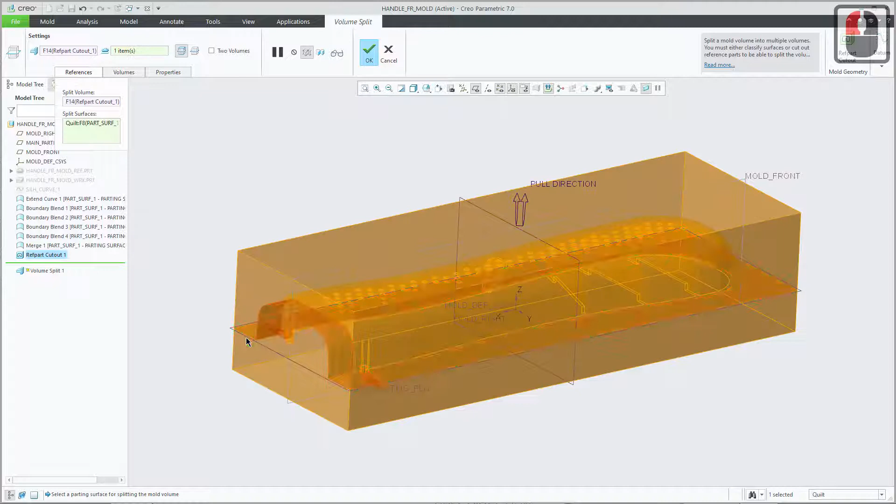Split surfaces, so I'm clicking here. If I now hover over where I know my merged surface is, it will highlight. So that is my merged surface. So if I click on that now, and then if everything's successful, I will get this yellowy kind of preview of what's going to happen. So that's not particularly informative, but it is reassuring that I do have a preview, and that means that I'm reasonably confident that this volume split feature will work, that there's not going to be any errors with it. So if we click on OK, it appears to have worked.

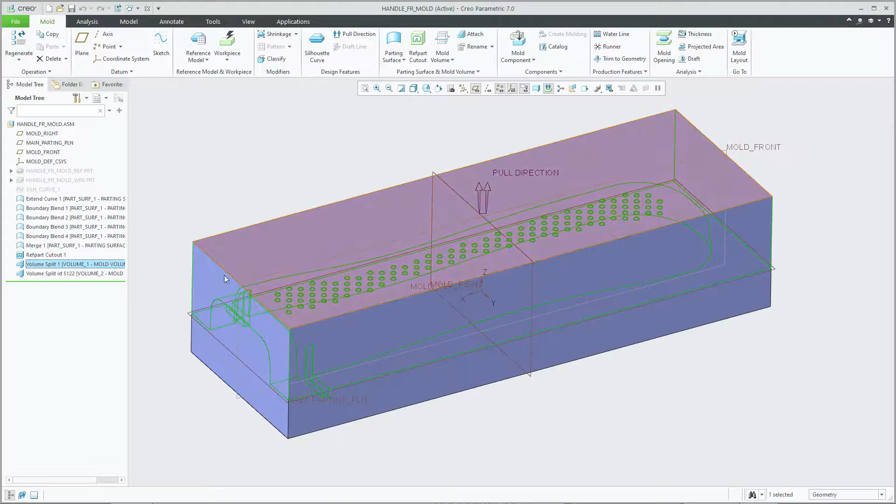But what it's done, just like we saw before, is rather than deleting or modifying the ref part cutout itself, it's taken a copy of ref part cutout and it's created the upper half of what we require, so the upper half of the mold, and it's created the lower half of the mold. So we still have ref part cutout as an unmodified item. That is a block with a cavity missing in the middle that we created.

So this is how the molding tools within Creo work. They're what's known as non-destructive. They don't modify any of these features or parts directly. They always create a copy in the model tree, and it's the copy that is modified. So you can always go back one step. You can always go back to the step where we did the ref part cutout and edit the definition if you want to, or you can go back to the original reference model and maybe make a change there, or the original workpiece and maybe make a change there.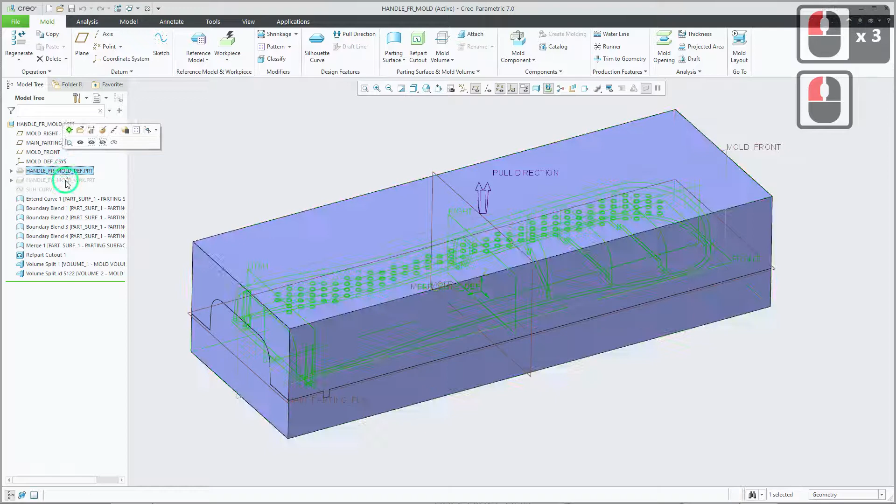So it always creates a copy of the thing that you're editing, and it edits the copy rather than making any changes to the original. So you can always go back to a previous step. But what it does mean is you have to get into the habit of hiding things in the model tree, because otherwise you'll get lots and lots of features and lots of geometry that is all on top of one another, and it becomes very difficult to select one thing versus another.

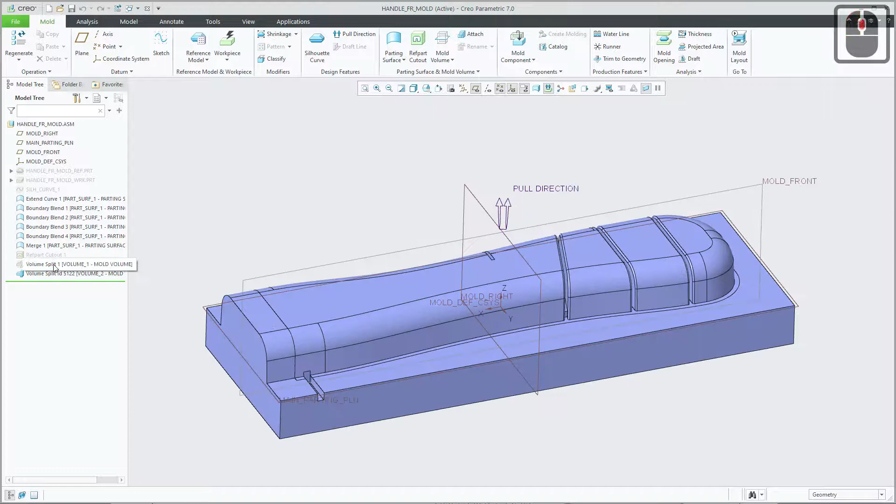So it's useful to be able to hide some of these features and parts that are higher up in the model tree. So that's what I'm doing here. I'm hiding ref part cutout 1 because we've finished with that step. I can just see my volume split 1, which is the mold upper, and my volume split 2, which is the mold lower. If I want to inspect them independently of each other, I can hide one of them. So that's the lower section that I've created of the mold. And then if I show the upper and hide the lower, that is the upper section of the mold.

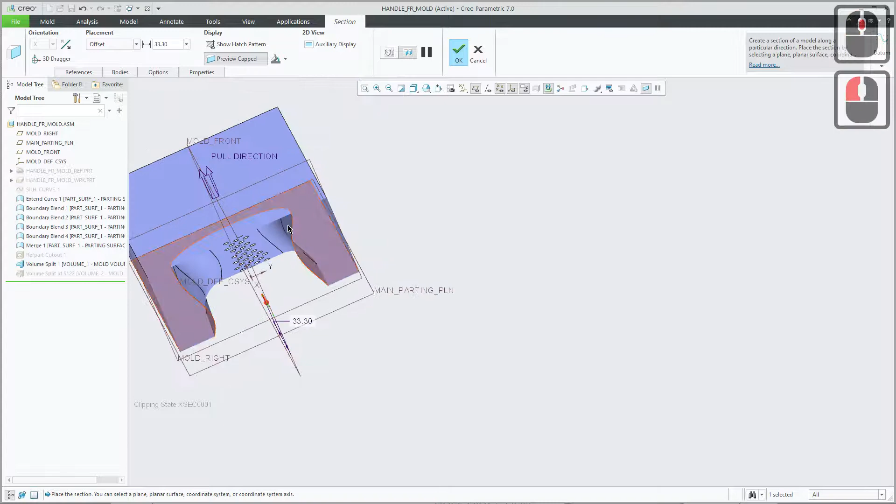So we're almost there now. We've almost created our two-piece mold, or our two-piece molding tool. But these upper and lower tools are still hollow. They are still just a collection of surfaces. So if we want to check that, maybe we don't believe that at this point, we can click on the view icon again, go back to section view, click on one of the end faces, drag that section view into the part, and then stare into the part there. So you can see, hopefully, that is a hollow collection of external surfaces.

So it fully describes the shape, the external shape of our mold, but it's not yet considered by the system a solid block of material. It is a hollow collection of zero thickness surface faces. So that's the key thing there. These surfaces have zero thickness, so they're a purely mathematical concept. They cannot exist in the real world yet. So we can't export these two halves of the mold out as usable Creo parts yet. So there's one more step that we must do.

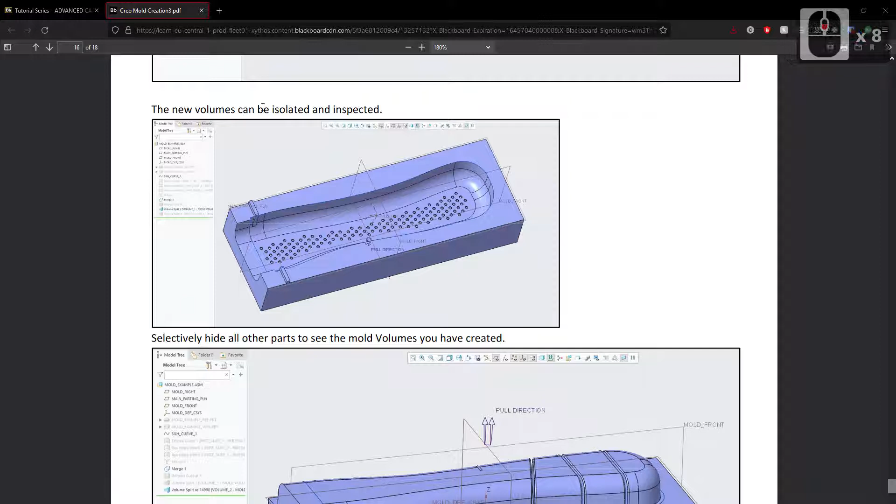So I'm going to cancel that cross section. Do I want to cancel? Yes, I do. I'm going to go back into the molding tab. I'm going to have a quick look at my PDF guide. So we've done our volume split. We selected the splitting surface. We isolated and inspected the individual volumes that we've created. So there's the mold lower half and there's the mold upper half. And there are the two volumes in the model tree. We've appreciated that they are merely surfaces and that they're hollow and can't be used for parts or for manufacture. We must convert them into actual usable solid parts. So this is what we're doing in this step here.

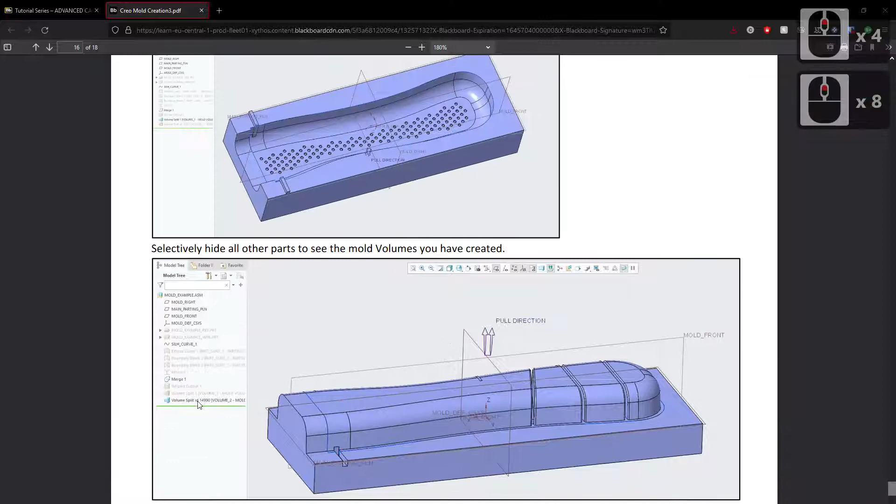So this is the tool that we're going to use. It's inside the mold component drop down and it's cavity insert. And if we read what it says about the tool, create cavity insert parts. So parts is the key word there. These are going to be real parts, real solid parts from mold volumes. So these were the mold volumes, volume 1 and volume 2. And this tool takes those mold volumes and creates actual parts from them. So this is what we're going to do next. So mold component cavity insert is what we're going to do.

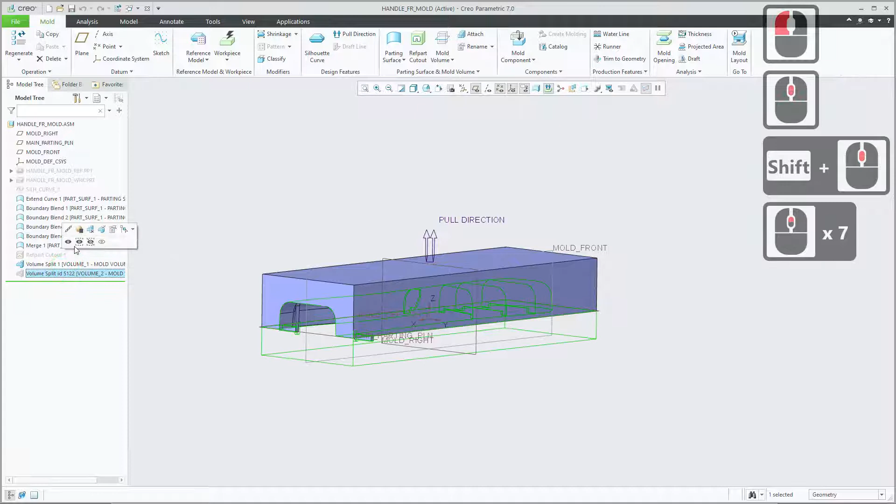So it may be useful to show both of the volumes. It's not essential, but I'm going to show this volume. So there they both are. So it's mold volume, mold component, cavity insert. And then essentially what it does is it scans the entire model tree for any mold volumes and it lists them in this window. So we have two. There they are. Mold volume 1, mold volume 2. One for the upper, one for the lower.

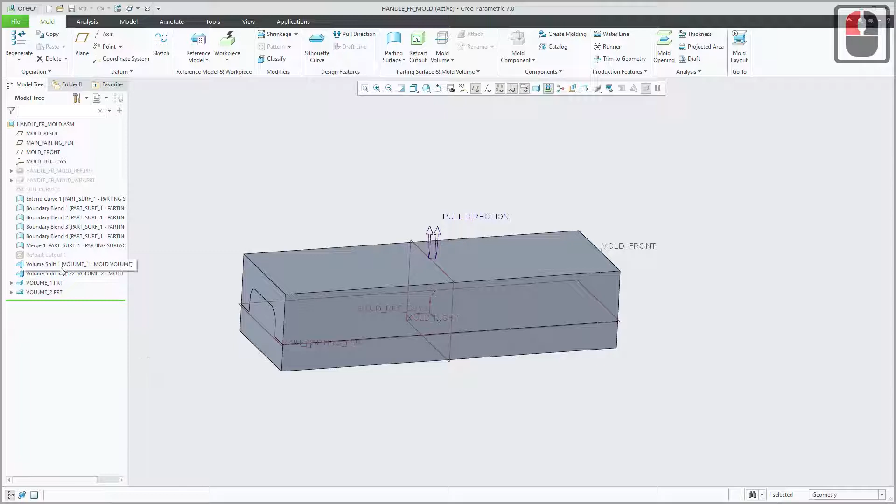And any of these that we now wish to create solid parts from, or real Creo parts, we just select them in the list. So I'm clicking on the first one, holding down Control, clicking on the next one. And then if we wanted to give them a more descriptive name, we could do here. We could change the names from volume 1 to mold upper or mold lower or mold cavity and mold core. But we're not going to do that in this particular example. Just know that it is an option. So I'm just going to click on OK. And then just as it's done before, the system has inserted some new features or some new parts down at the bottom of the model tree.

So the volumes are still there, the surface volumes, but it's now created two parts. And I know these are Creo parts because they have the .prt extension on them. So if I want to check what these are, I now have the luxury of opening them up in their own part modeling window. So I can click on one of them in the features tree, go up to open, and here is the part in its own part modeling window.

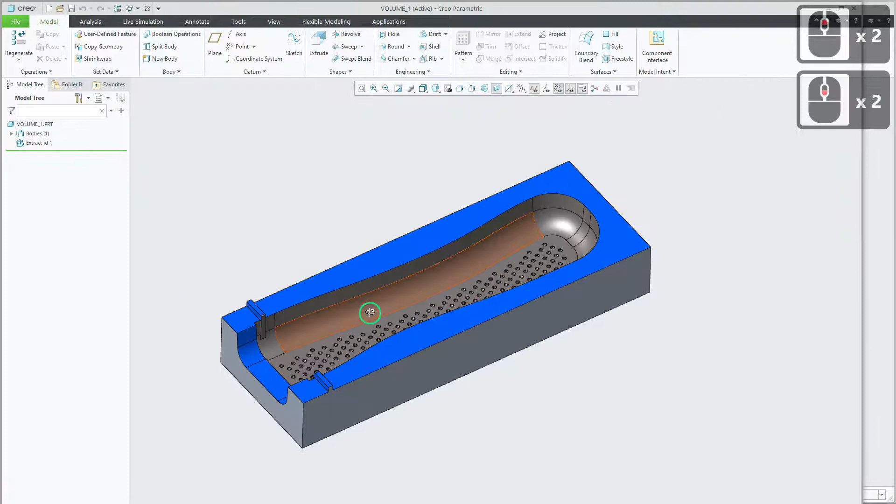So I could then take this part onwards and maybe do some more manufacturing activities, such as creating a CNC program to machine this out of a solid block of material. I could use this part for activities such as that. And if we want to check now, is this actually a solid block of material, we can do the same cross-sectioning technique that we did before.

So if we click on view, click on section, click on one of the end faces, and there we go. It's no longer a hollow collection of zero thickness surfaces. It's actually solid material all the way through. So that you can regard as a genuine Creo part that you can then use for other activities, maybe further down the manufacturing timeline. So that is our part.

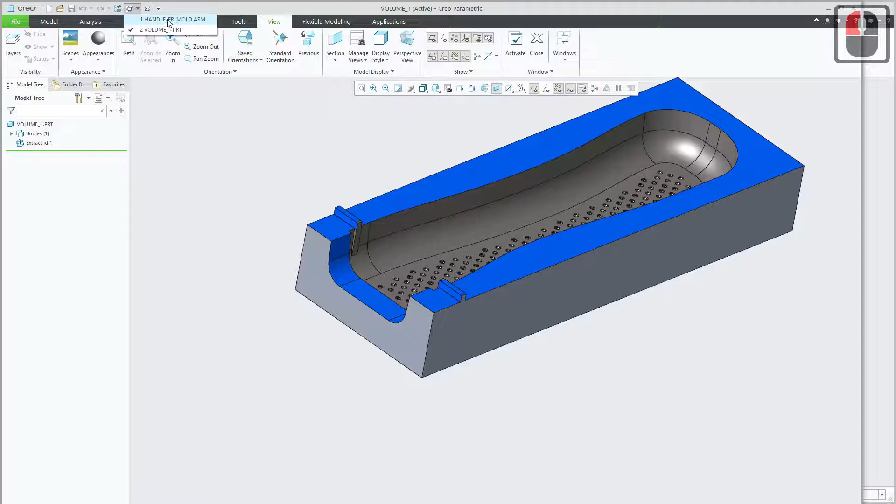If we want to go back now to the assembly, we have to go to this icon here, which lists any windows that we have open within the Creo software. So there's our manufacturing assembly. So I'll click back on there. And then if we just want to check the PDF, so if we just have a quick look.

So we've created the 2 volumes. We selected volumes 1 and 2. We now have these solid parts. We can inspect the solid parts within their own part modeling windows if we want. There's the other half of the part. So the end section here is just highlighting the fact that this is a very basic workflow of how to create your 2-piece mold. There are further molding tools within the molding environment, and some of them are highlighted here.

So you can insert runners into the mold. So runners would be the pathways down which the molten plastic will be injected through into your mold. You can insert mold features such as ejector pins, which when the molded part is almost fully solidified, the ejector pins will push the part off the mold half that they may be gripping onto, despite their draft angles. So you can add a whole plethora of extra mold furniture into your mold designs.

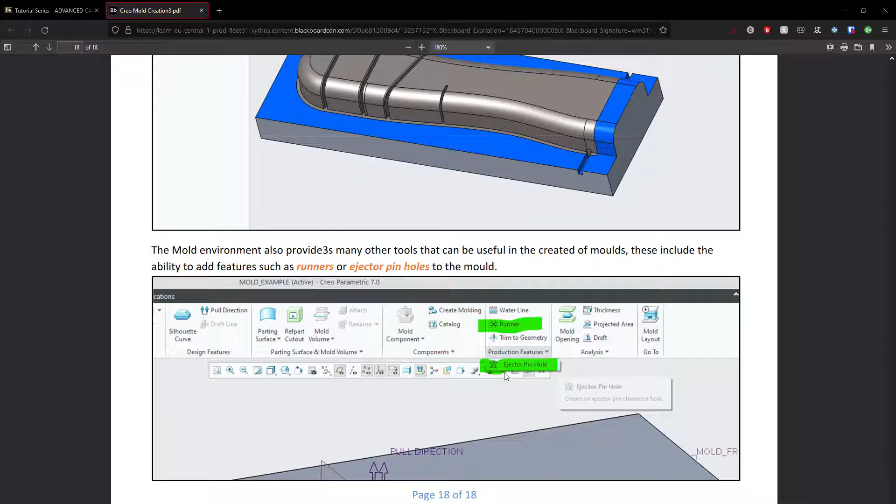But this tutorial purely covers the main setup steps, those 9 steps that we talked about back at the top of the PDF there. So here they are, just to create your basic mold halves or mold parts. So I encourage you to have a little look at some of the other molding tutorials which are contained within this week's learning materials. Have a little play around with some of the other tools.

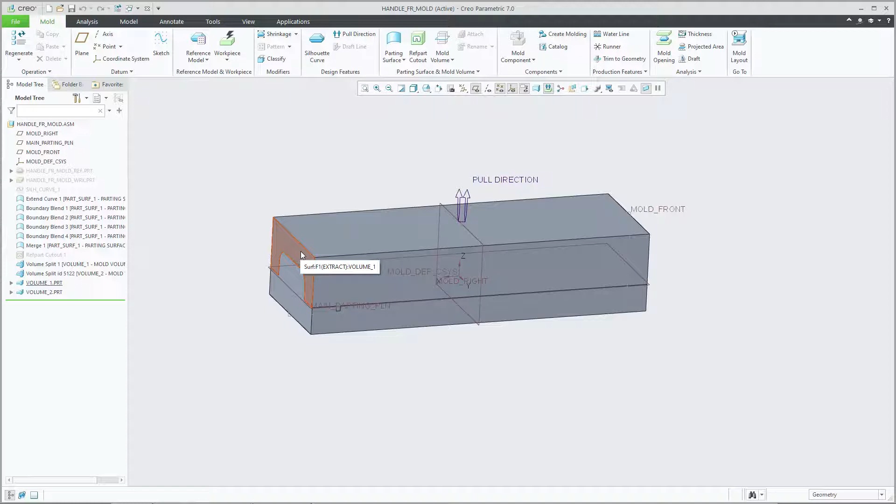Start thinking about how you might apply what we've done here today to the tasks that you've been set in your project work as well, because there's a specific section within the project that requests that you create a molding tool of your rear cover that you're going to design for your knife. So this very much helps you in that process. If you try and replicate what we've done here today in that section of your project, then you should be fairly confident that you will get the majority of the marks.

So one final thing here, obviously we've created an assembly here, you can see, because it's got an ASM extension on the file name. So if we want to take a save of this, we just click on save. It navigates into our working directory, and we just click on OK, because we've already given it a name. We don't need to type a name or anything like that. So it's taken a save of the overall assembly, so we can come back in here and make changes if we need to, but it will also have taken a save of these 2 part files into that working directory.

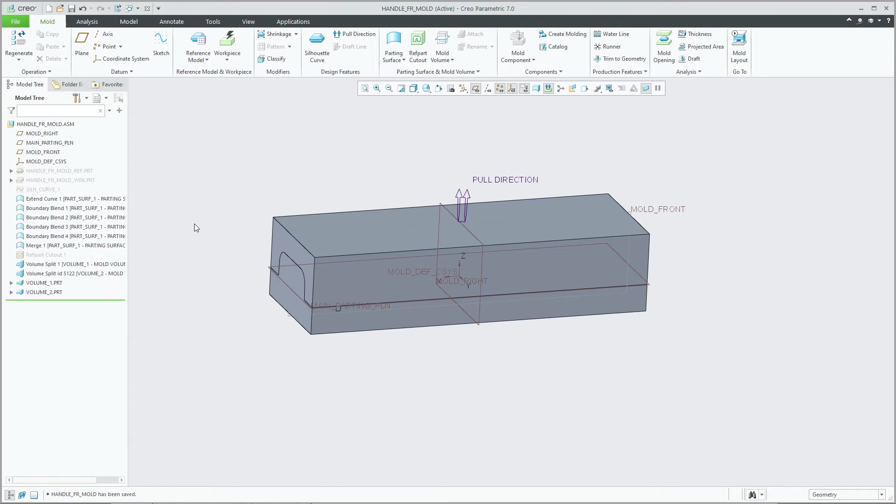So you can now load them up and use them in other processes, as we've talked about. Maybe CNC machining processes where you will want to CNC machine the mold shape from a block of solid material. So that's the end of this tutorial, and we will continue the moulding process next week with some analysis of the actual moulding process itself. So analysing things like mould temperatures and injection times and injection pressures and different types of plastic, things like that.